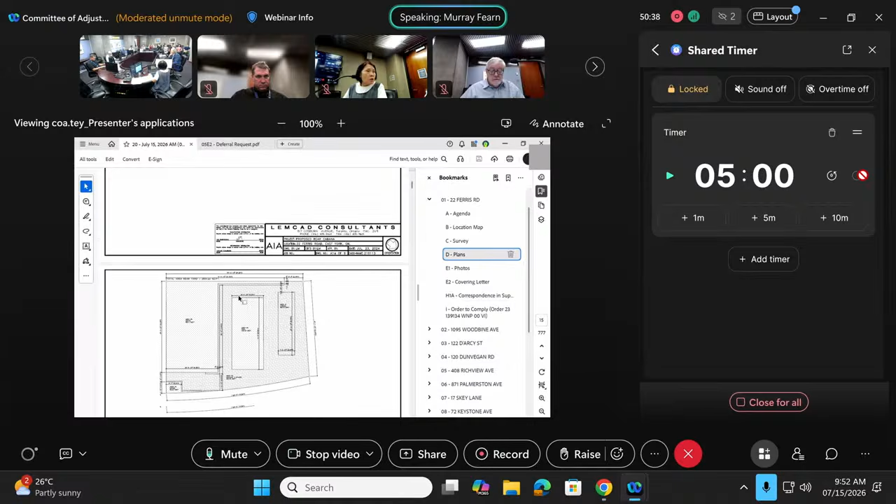I really don't have an answer for that. I know the original designer, Lemcad Consultants, that was their name. I just have a feeling that they told the owner that they didn't require any variances. But they did produce a set of permit drawings, and again, because they required variances, they couldn't make an application for permit. Again, it's unfortunate that this was built.

It seems that the order to comply was issued in 2023, which is, I guess, 3 years ago. You're taking this long to comply with the order. I mean, this cabana was built even before that, right? Yeah, I guess. Yes, it was 2023, but I think it was built before that. We just like to get some background for the application. Sure, that's all.

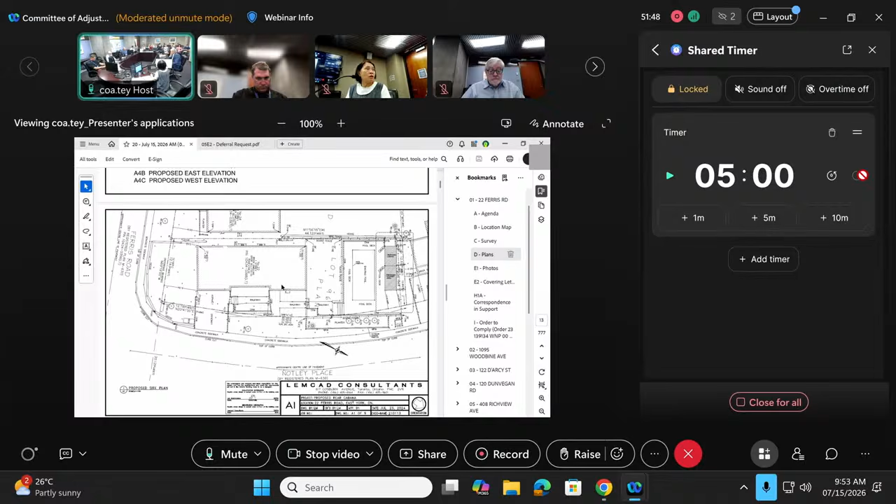Let's see if other panel members have any questions. No questions? So are we ready to take it into committee? We do not have any more questions, so now we're in committee.

I'm not sure the answer we got to the reason and rationale was particularly satisfying, especially the 3-year delay. I mean, I think we all probably know what happened. It was done trying to get something completed without getting the appropriate permits. But what we have before us is a relatively minor series of variances. There is no opposition to this one, and it's really just the setbacks that are the major concern. I don't think, given that this is a corner lot, there's any impact. So given all that, I'll move approval of this application.

Do you want to add the reason for the record? Yeah, thanks. Just because we do not condone people building without a permit, that's why we asked the questions, but I agree we'll do the standard approval for the record. So are you making that into a motion? I made a motion, yeah.

Second to move? Madam Chair, Gary seconds. All in favor with that note? All in favor, it's approved. Thank you.

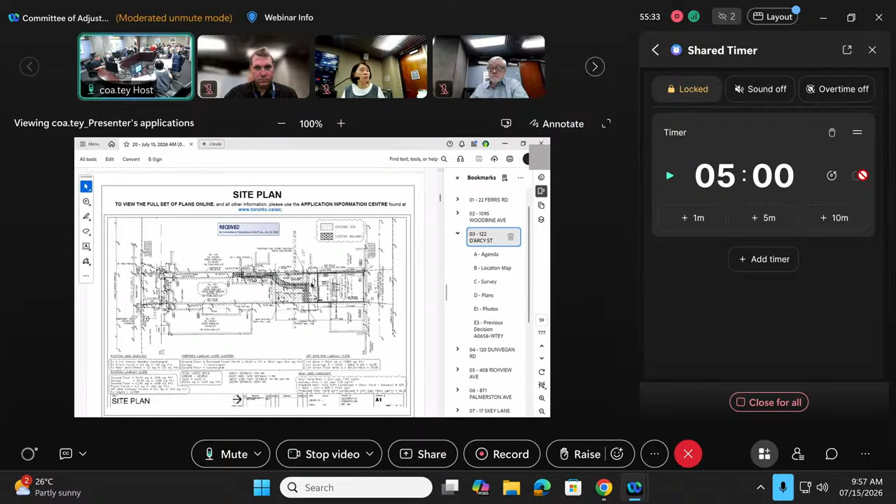My name is Yi Chow, owner and applicant for the variances for this enclosed patio. I've been in communication with both my adjacent neighbors. One raised a little concern about the height of the structure, which we've addressed, and he's satisfied with the proposed structure as drawn for this application. The other neighbor has been supportive all the way.

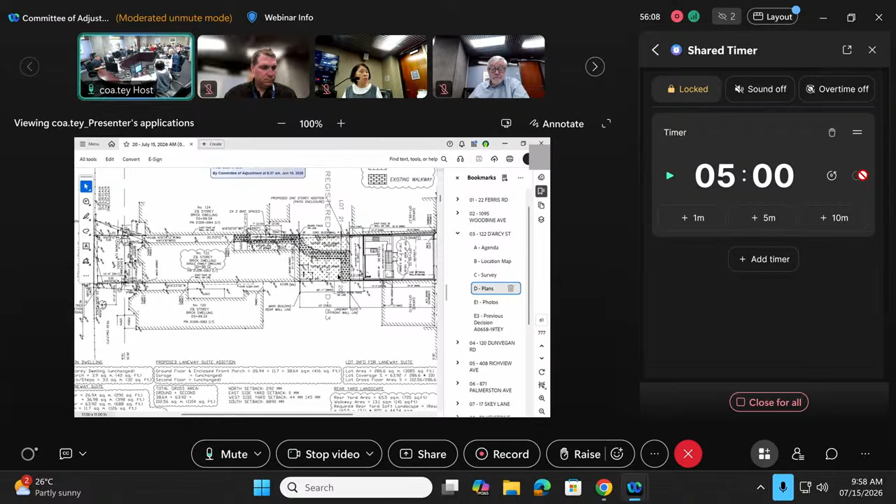The variances are kind of minor. Regarding the space issue, it's really because we built a 4-foot walkway between the front and the back for accessibility, so we can clear snow easily. That's all I have for you today.

Any questions? Just wanted to check in terms of the height. The variance before us shows the height of this ancillary building as 5.73 meters. Has that changed? Yeah, we changed it, we lowered it to satisfy the concern of my adjacent neighbor. I was asking if you have a new height standard you can tell us, because we're looking at the bylaw requirement.

I'm not sure about that, sorry. Just to clarify, this is only a one-story extension, right? Yeah, you're not extending from the roof. No, it's just one story. So the height we're talking about isn't the height of the whole thing, it's the height of the specific little extension. Thank you for that clarification.

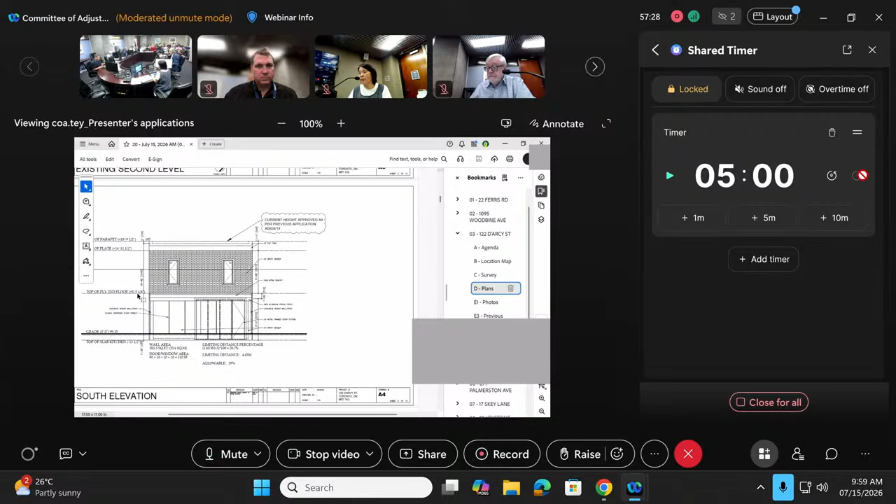In the drawing, A6, the section will show the one story. Yeah, you can bring A6 up.

It's already a sunken patio, right? Yeah, it's already sunken. So there's something on the surface already, you're just covering it and also enclosing it. So how sunken is it? About 16 inches. But right now, when it rains, I'm collecting like 2 inches of water in that area. You can see it is a little bit lower than the grade.

The variance we're doing for the distance from the house is adding this space, right? Do you mind if we tie this to the site plan elevations to make sure it's only the lower level that we're approving? Yeah, it is only the lower level, that's all we're doing. I think the sections show it's only one story, so it's not a two-story extension. No, no.

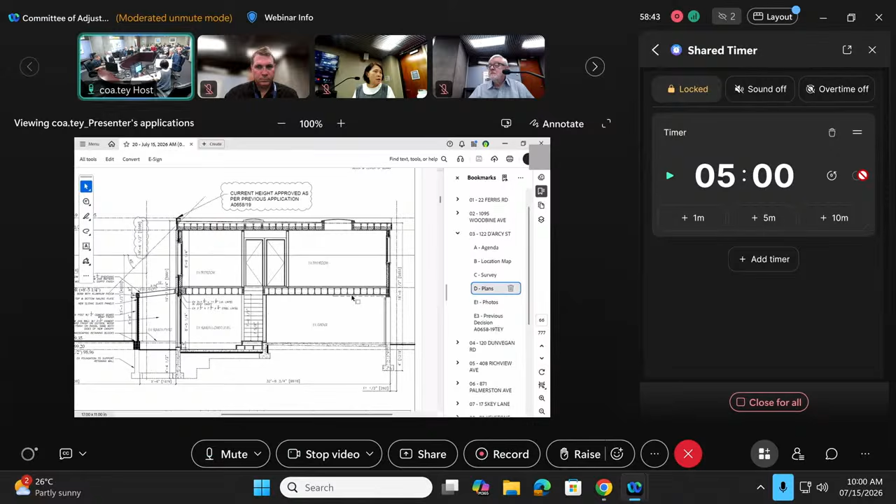The site plan, what number is that in the drawings? A1, and the elevations. Matter of fact, a lot of existing properties are already deeper than I am, and there isn't anyone opposing these applications anyway.

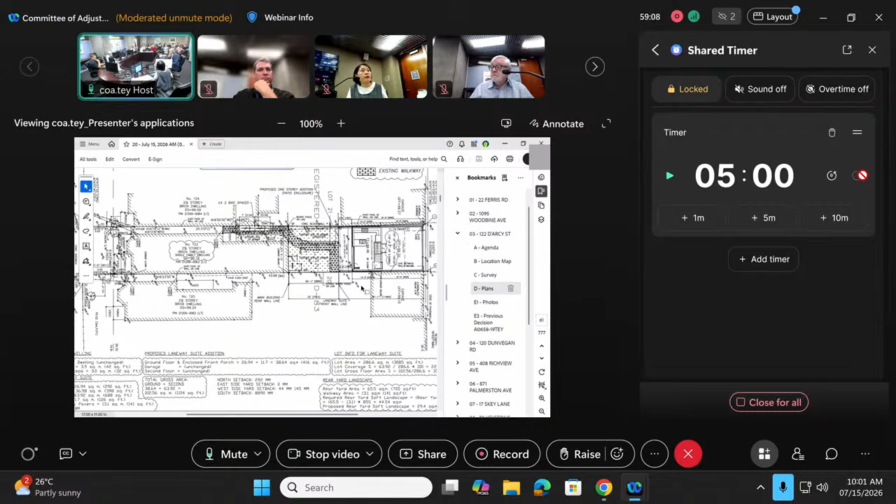Any other questions? All right, we don't have any more questions, we are in committee now. I was initially a little concerned about this in terms of a creeping extension, but I think the explanation makes sense. I understand that because it's sunken, it would be gathering snow and rain, so I understand that. I think this is supportable with the condition that we tie it to site plan elevations.

Is there a motion? It can be, unless anyone else wants to. I'll make a motion to approve these variances with the condition that they be tied to the site plan and elevations.

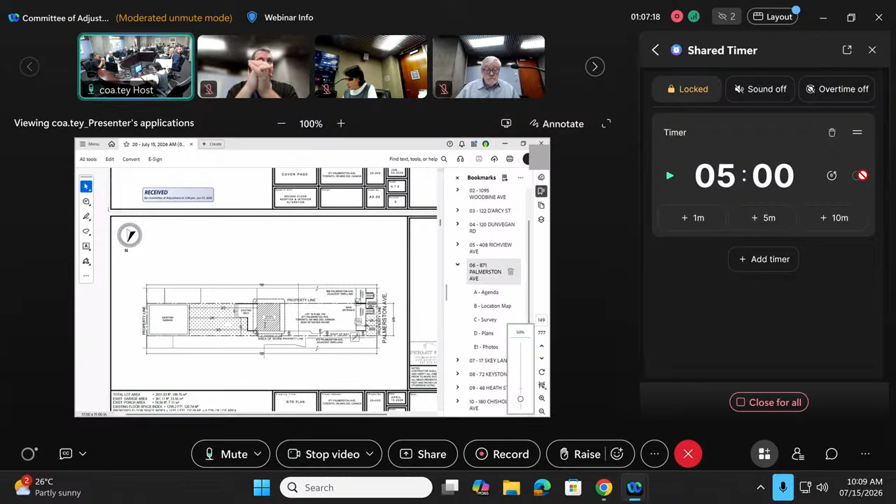Ryan, please. I'll put forward a motion for these 3 variances, that they are granted approval, with no conditions. Second? Gary, second. With no conditions, all in favor? It's unanimously approved. Thank you. Appreciate it.

Okay, item number 7 is withdrawn, and next is item number 8, 72 Keystone Avenue. This is to alter the existing 2-story semi-detached by constructing a front 3-story addition, a front porch and with canopy, and a rear 2-story addition, and a partial 3rd-story addition with a rear balcony, and a ground floor deck.

We have received survey, site plan, floor plan elevations, revised site plan, floor plan elevations, a red line public notice, a revised zoning notice, 8 photographs, and a cover letter from the agent. We have received a staff report from urban forestry and also community planning. That's all the material we received, and we are ready for the agent or the applicant, please.

Through you, Madam Chair, we have the agent online and 2 registered speakers. One of them is the owner and another one is in person in opposition. Oh, okay, thank you.

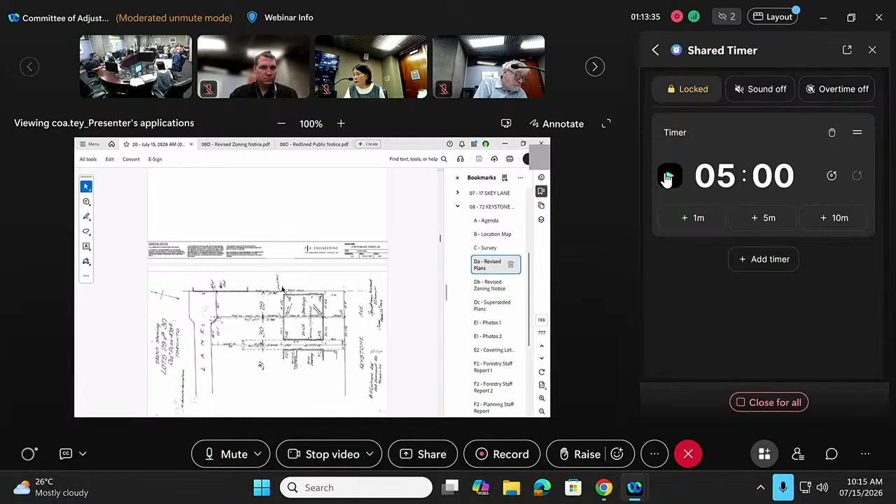Sure, okay. So the current homeowners, Ronan, their family is growing a bit, so they needed additional space. Initially, we had proposed a front and a rear addition. Upon consultation with community planning, we modified the front addition to be only a front porch enclosure, and the rear addition to span the whole 3-story.

There were some minor changes related to landscaping on the rear and the front, because in the rear, 50% of the rear yard must be maintained as soft landscaping. We're close to it, we're about 46.7%.

There is parking at the rear as well, which the owner wanted to maintain. Initially our plan was either to go with a laneway or keep the parking space at the back, so street parking won't be affected. That's one of the reasons they decided not to go with a laneway home and just did an addition on the rear.

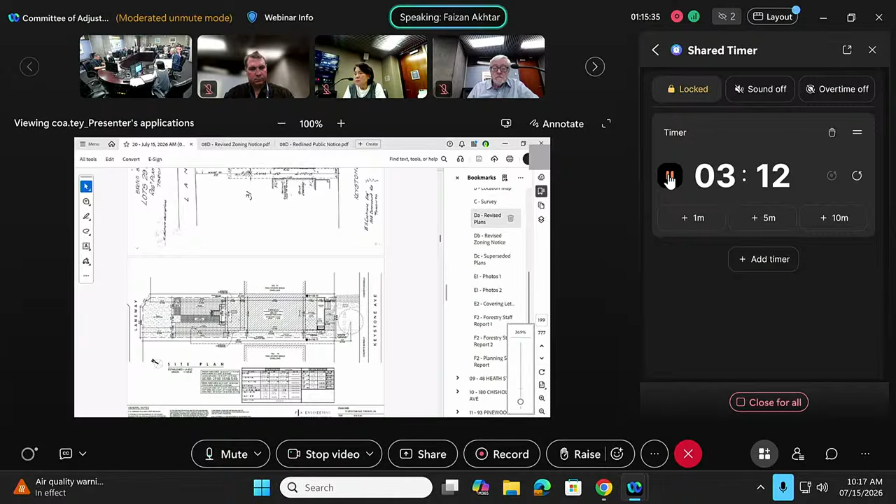Apart from that, there are multiple instances of similar variances that have been received on the street as well, multiple front porch enclosures on the street. Community planning reviewed that, and we had multiple Zoom calls with them, and that's where we came to the conclusion that the front enclosure should be allowed because there are multiple instances of neighbors having front enclosures and similar variances. So I kindly request the Committee of Adjustment to grant us the approval.

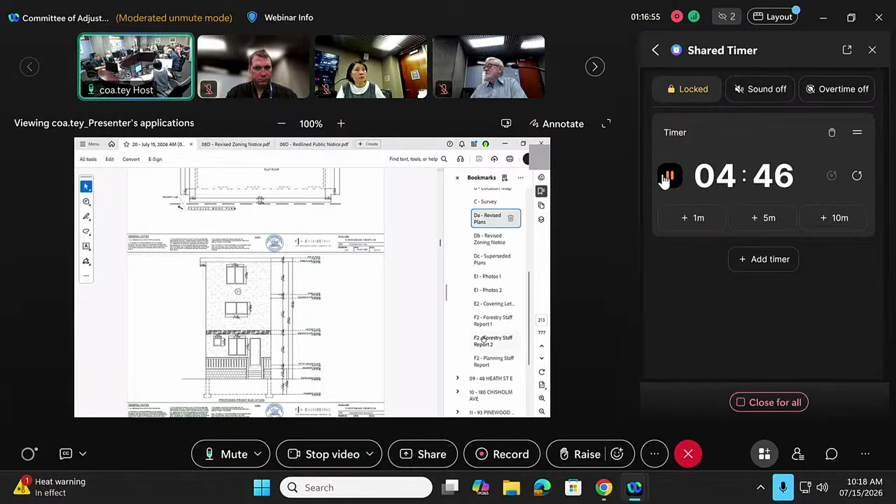The white oak in the backyard wasn't in the original plans, but the city noticed it a week ago and has asked that the committee defer, and if they don't defer, that they make it conditional on some conditions. Yes, I agree with the city. I agree with urban forestry. This needs to be conditional on an adequate, comprehensive tree protection plan.

Yes, we'll consider that for sure. Any other? We still have to take it to committee. The city doesn't have a great track record on white oaks on Keystone. The one at 56 was supposed to be protected, and it was killed by Marlin Spring.

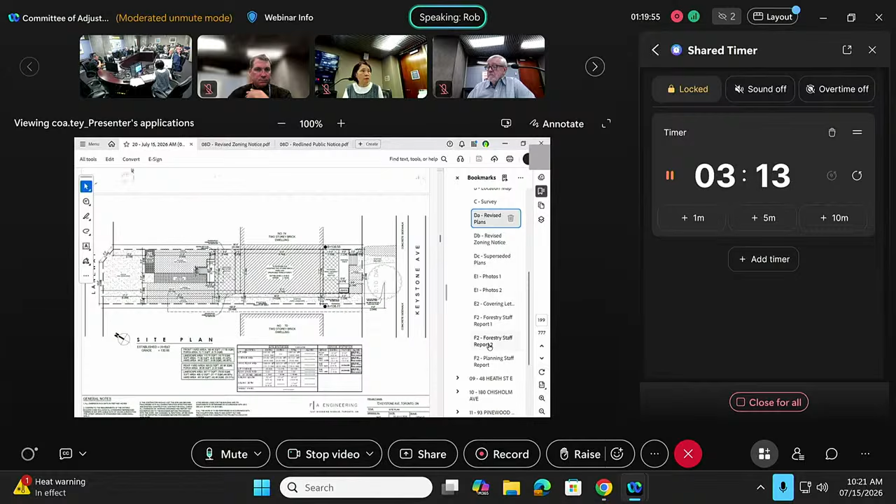Oh wow, it's within 8 inches of my fence, or our mutual fence. I wish it was on my side, I would make sure it wasn't destroyed. But the roots will have to be damaged when they do this addition, and there's no way that this is not going to affect or kill that tree. You can bring in an arborist to check it out, but it's so tight you can't swing a cat in the space between my house and my neighbor's.

As you see in the picture there, it's just a small breezeway. That is the trunk, and it is very tall. The other tree, there was a twin to it on the other side that was destroyed by Marlin Spring when they put up the condominium on the Danforth in the back. It killed the roots in that tree, and it had to be taken down. It really affected the lighting and the whole atmosphere for all the people on the street.

It goes against the spirit of the original bylaws in the sense that all the houses in a row share the same space in the backyard. This one house having an extension in the back would destroy that feeling and would destroy the atmosphere in the back. Anyways, thanks, that's all I need to say.

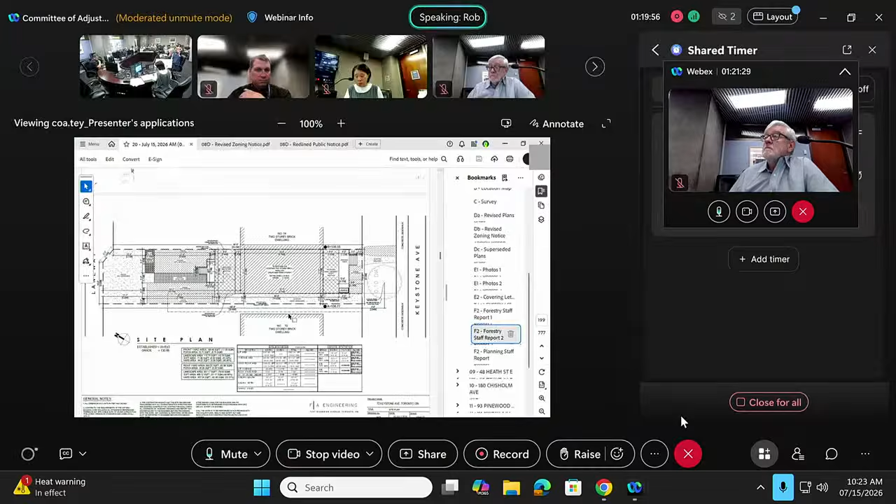Essentially everybody's concern is related to the tree there. Like I mentioned, we've already engaged Davey Tree Expert, the arborist. They've mentioned they'll be working on tree protection itself and any associated measures they would need to take to have the tree not be injured with that addition, the rear addition there. So apart from that, it's not in my expertise, but we've engaged an arborist, and they'll be providing a satisfactory report. And if approved by committee, there will be a condition to get clearance from forestry.

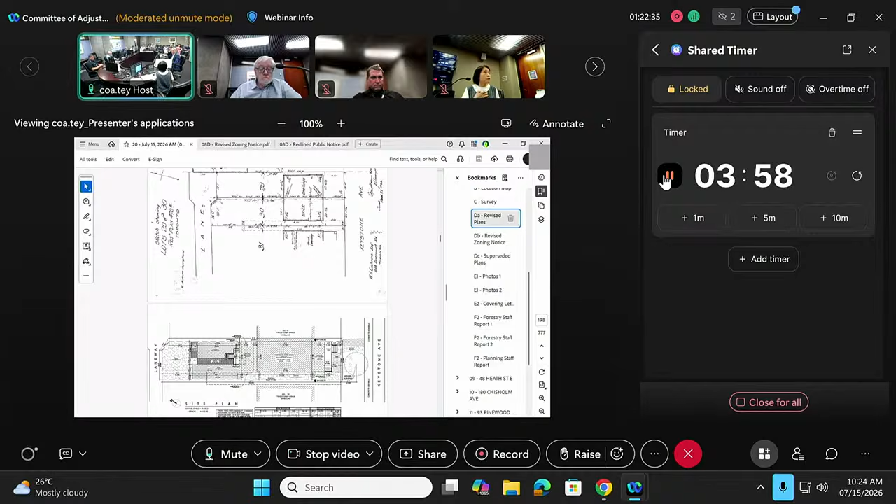Any question? I do have a question for you. By listening to, oh you have. I have a question. Yes, me too. Oh okay, I'm going to ask, and then. Oh all right, I didn't know if you saw me, sorry.

My question is that after hearing the other deputants' comments, it seems that it's not a matter of just you will protect the tree. It seems that the current design or plan will actually inevitably have to remove the tree, and the tree is quite substantial. I'm not too sure you said there's a tree protection plan that has got enough assurance for that tree not to be removed in the future or injured. So what is the plan that you have discussed with your arborist?

What's the intention? So they've assured us that the tree will not be removed or be substantially injured, right? There will be some pruning required to the roots, because the roots do extend outward, but apart from that it won't be removed or damaged. I believe that's the major concern for the neighbors, that it will be removed, so it would definitely not be removed.

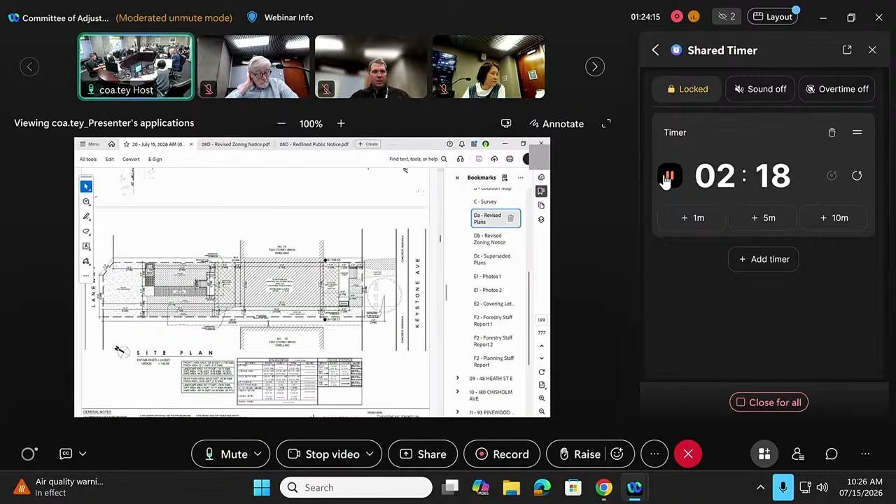Oh okay, thank you, any other question? Yeah, please. Just looking at your revised site plan, the tree that we're talking about isn't on your site plan. I do notice you put a tree in on the front yard, but I don't see it identified in the rear yard on your revised site plan. How far away is the tree from your proposed addition?

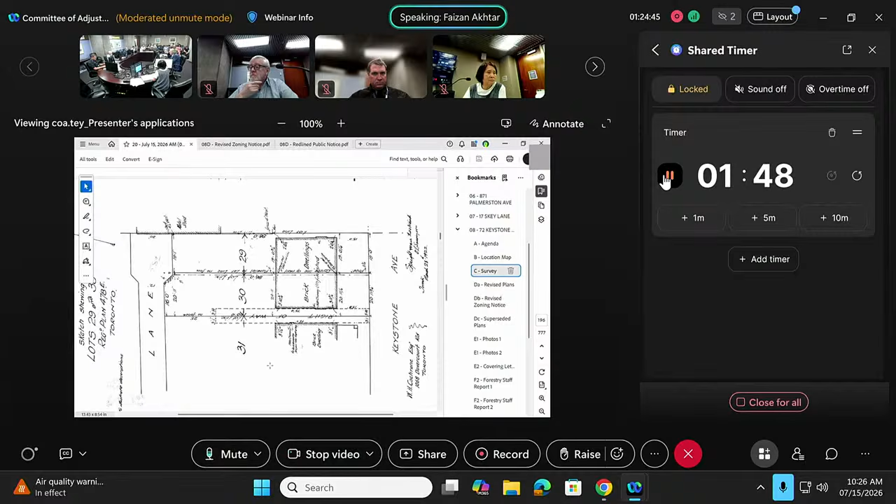So you could see the survey that we were working with. It was a very old survey, I think from the 1940s. It did not identify the tree there, but if you open the site plan, you could see where the tree would be. Here, give me 2 seconds, let me just open it up.

The tree is about 6.5 feet, roughly, from the addition itself. We do not know exactly because it's not indicated. So you're saying it's about almost 7 feet from the corner of where you're proposing to excavate the basement foundation. Correct, yeah, that's what we discussed with the arborist, about 6.5 feet away from that addition.

So any injury to the roots that extend outward will be minimal. Right, and depending on what forestry says with respect to that, would there be mitigating measures done if in fact there was going to be irreparable damage done to that tree?

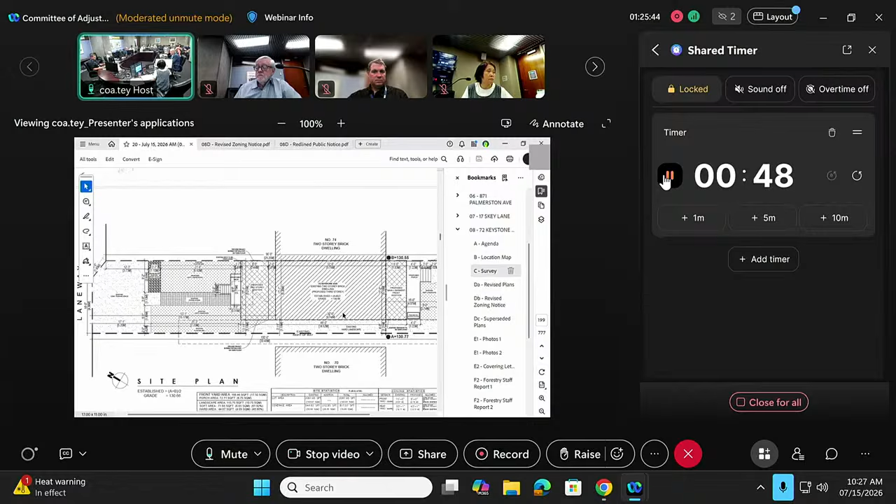I just note that in the forestry staff report, they do include a photo of this tree. And I think the neighbors are rightly raising concerns because it is a fairly mature oak tree, which does a number of things, not only shade, but it also shields some of those residents from the large condominium behind, which is a helpful part of the backyard viewscape.

So I think what you're hearing is that the neighbors are very concerned about this tree, and I think rightly so. So you're telling the neighbors that if there's any damage at all, it'll be minimal? Correct, yes. And if forestry requires any mitigative measures to ensure protection of that tree, you will be doing that? Correct, yes. Okay, please, yeah.

I mean, 7 feet is actually quite close, given the usual tree protection zone for a tree this size. If forestry says that you can't dig out the basement and need to use helical piers or something instead, is that something you're willing to consider? Correct, yes. We're even looking to build it on sonotubes if forestry doesn't give us clearance for the basement excavation.

Okay, yeah, because I feel like that may be the issue, that you may not be able to do the basement excavation for the sake of the tree. So, okay, thank you. Okay, so any other questions?

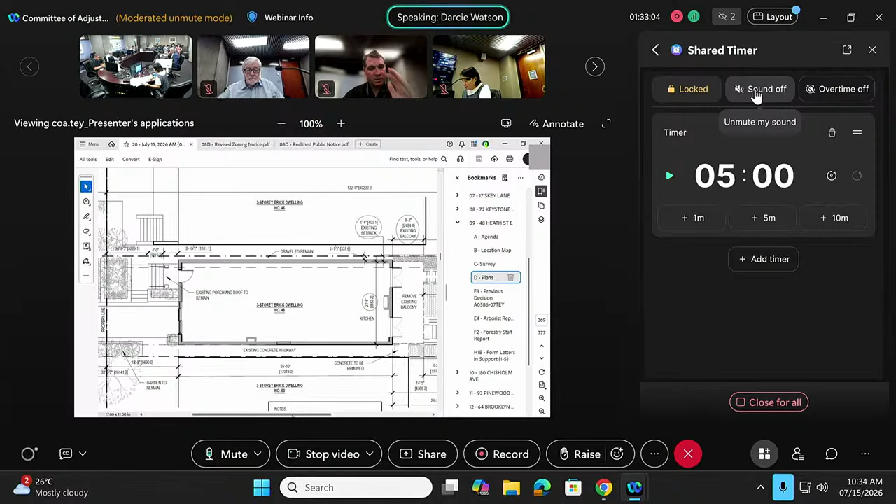The deck, so there's 2 variances. One is on the west lot line, and we're suggesting the deck be built in exactly the same location as the existing. In terms of depth, we're asking for 2.9 meters instead of 2.5. The reason is it's an unusual split level plan where the first floor housing the kitchen, dining room and living room that this deck serves is 1.9 meters above grade instead of the standard 0.9 meters or 3 feet. So that's one reason for the additional depth, which is 0.4 meters, so 1 foot 3 inches additional. So it's slightly larger. Slightly, yes. Okay, thank you.

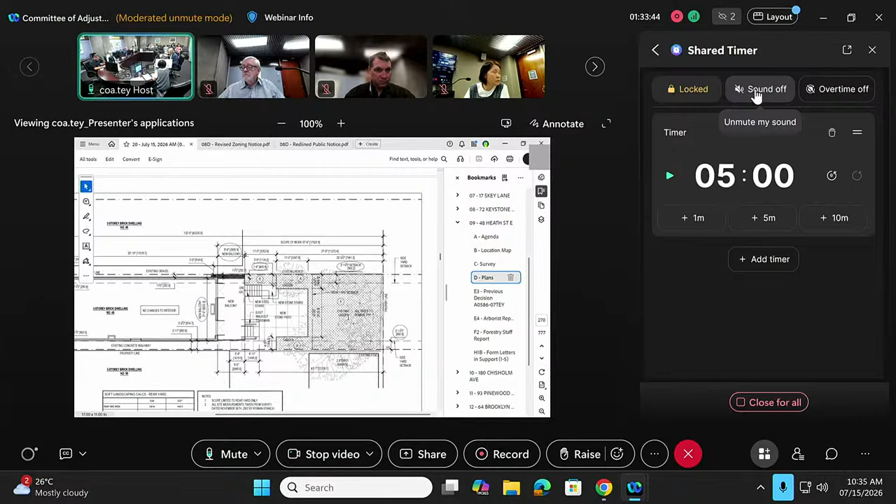Just a quick question, looking at your site plan. I noticed in the photos you have paving stones in the rear, and your site plan says the paving's going to be removed and replaced with what? We're taking out the smaller brick-sized pavers and putting in a 2-foot by 2-foot paver instead, essentially replacing the existing patio. And the rest of the rear yard is sod, grass? It's grass at the moment, and it's actually a very well treed backyard. There's quite a few trees around and we're not touching any of them. We want to leave the full treed backyard feeling and leave the existing sod or grass. Okay, thanks.

Thank you, any other questions? All right, we are in committee now because we don't have any more questions.

Yes, please, I'm happy to move a motion. These are really minor. It's essentially rebuilding what exists, slightly larger, with no impact on soft landscape or anything like that. So I think the impact is really minor variances. I'm happy to move a motion to approve it with forestry condition number 2. Okay, Larry, second. All in favor with forestry conditions? All in favor, it's approved unanimously.

Thank you. And next, do we need a break or shall we move on? I can keep going for a bit more. Okay, one more.

Item number 10 is 180 Chisholm Avenue. This is to alter the existing one-story ancillary detached building, which is a one-car garage, by constructing a one-story addition to the ancillary building for non-habitable insulated storage space. We have received a survey, site plan, floor plan, elevations, 5 photographs from the agent, and also a staff report from Urban Forestry. We're ready for the agent or applicant.

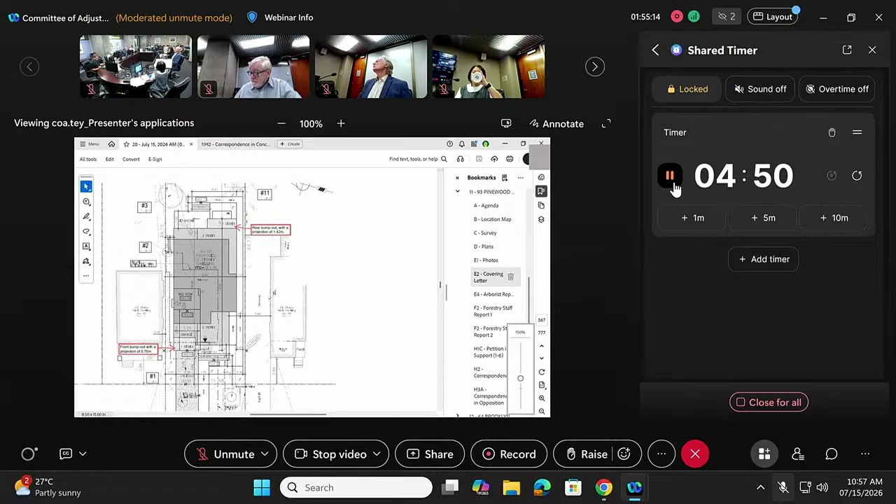In terms of the proposed variances, we are requesting approval for only 3 variances today. I did submit supporting sketches attached to my planning justification letter as Appendix A. So while staff brings that up, I wanted to note that.

Yes, right there. So the drawings on the left are what's being proposed—those are the proposed elevations. The sketches on the right are what could have been proposed if a flat roof design was introduced. This comparison is important because if a flat roof was proposed here, the variance for the side main wall height would not have been required, as long as the front and rear main walls were set back 1.4 meters. The yellow shading represents the additional massing that could have been permitted if a flat roof design was proposed. Rather than proposing a flat roof here, my clients decided on a sloped roof design, which is why this variance was triggered, because it fits in and reflects the existing character along Pinewood Avenue.

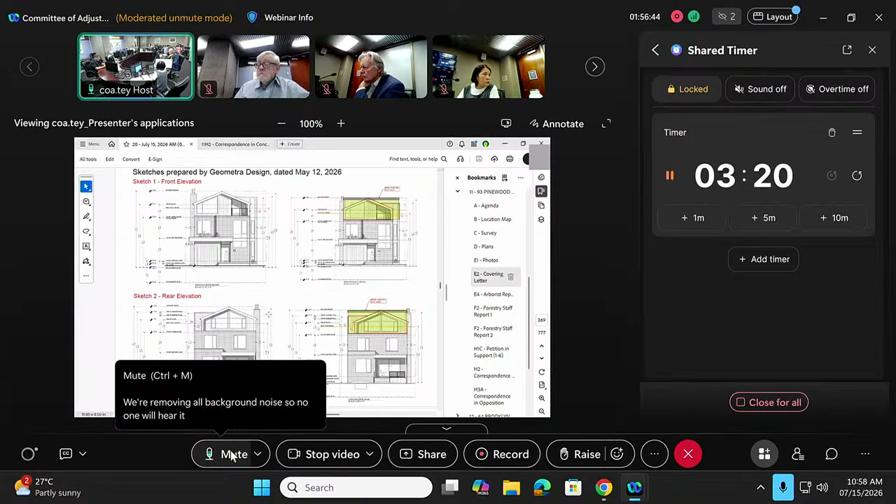I would like to note that the proposal on the third story is stepped back 2.79 meters from the front main wall and 1.42 meters from the rear main wall, which actually exceeds the setback that would have been required if a flat roof design was proposed. To conclude with that variance, the maximum permitted building height is 11 meters. We are compliant with that, and the bylaw does permit 3 stories here.

The second variance relates to the building length. If we could go back to the attachment within the text of the planning justification letter, that would be great. The building length is only triggered due to 2 bump outs, one at the front main wall and one at the rear main wall. If these bump outs were not included, the building length would have been 16.82 meters, which would have been permitted as of right.

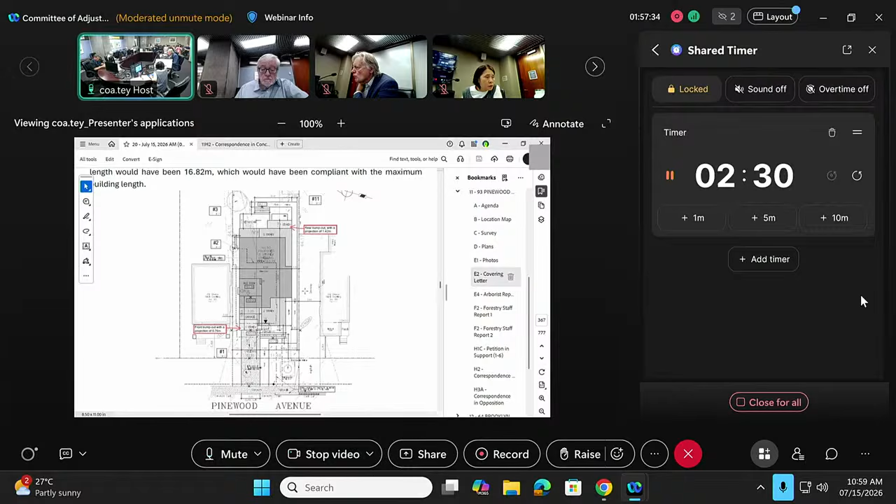The last variance relates to the front porch stairs. The front porch stairs will be 4.42 meters, whereas 2 meters is permitted. It's been designed to fit in architecturally with the front porch and complement the overall architectural design of the front entrance.

In conclusion, the proposed development and associated minor variances make efficient use of the property, meet the 4 tests under section 45(1) of the Planning Act, and fit in with the character of the neighborhood. I'm happy to answer any questions.

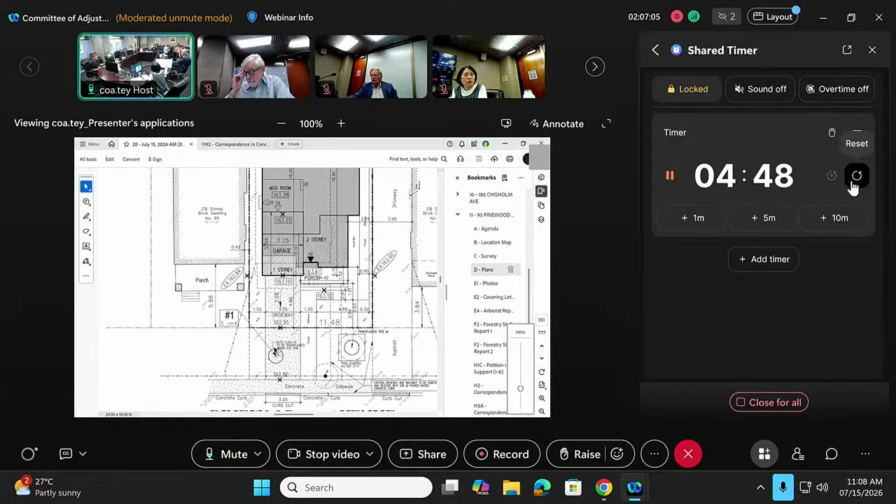I do want to start off with the comments regarding the driveway. The intent is to relocate the driveway, however the existing driveway and that curb will be restored, so there's only going to be one driveway. I did want to clarify that for the neighbors because I did hear that a couple of times.

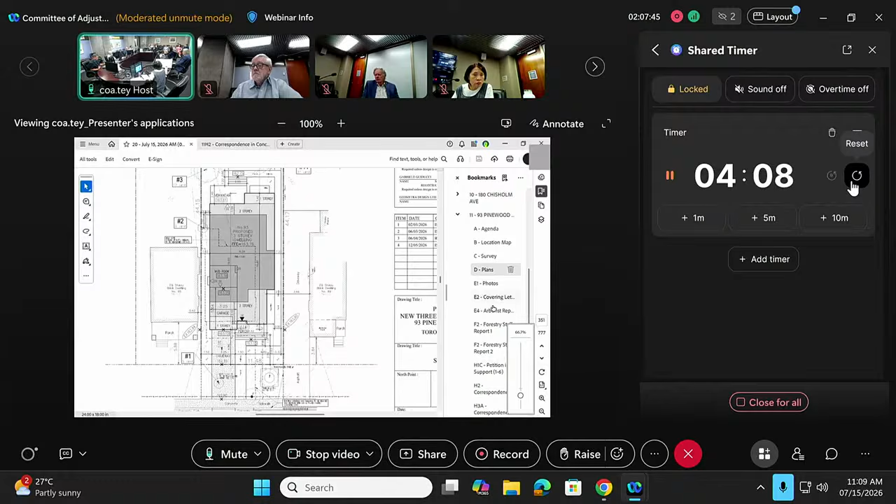In terms of the trees, I would like to note that the tree in the front yard, in the city-owned right of way, is going to be transplanted. Tree number 4 is recommended for removal, and as per the arborist report, it's due to structural conditions. The arborist report notes that to compensate for the removal of this tree, the city is expected to request 3 replacement trees be planted on site: 2 tulip trees and 1 red maple tree. And I did cover the loss of on-street parking.

In terms of neighborhood character, I would like to reiterate that our client specifically chose to do a sloped roof design here because it fits in with the existing character along Pinewood Avenue. That's why my client did not propose a flat roof, or else we would have not required one of the variances that's in front of the committee today. So our client wanted to design something along with the architect that's reflective of the neighborhood.

One final point I would like to mention is that over the past 10 years, there have been 205 committee of adjustment applications within 500 meters of the site. That demonstrates there has been redevelopment within the neighborhood, although the proposal in front of the committee today is reflective of the existing character and the planned context for the neighborhood. I believe I did answer most of the comments and concerns raised, but if I missed anything, I'm happy to answer any questions. Thank you.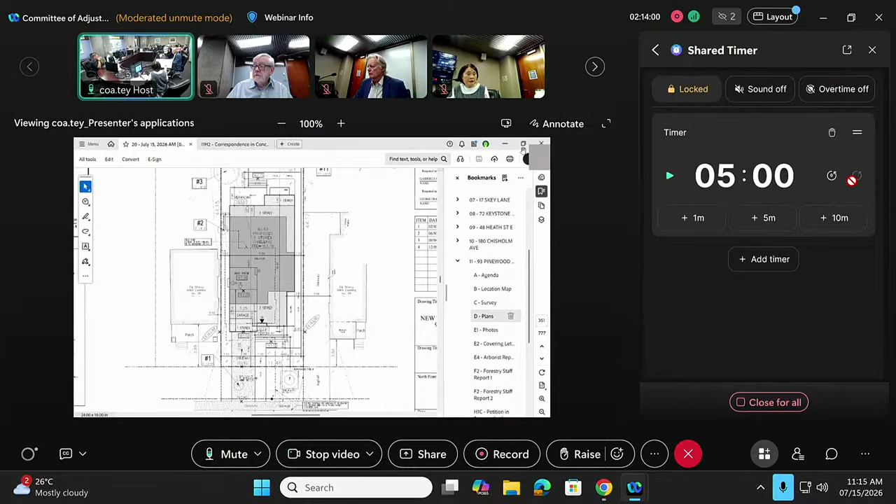Any other questions, please? Okay, now we do not have any more questions. We are in committee now.

I'm struggling quite a bit with this one because I do believe it's an improvement to the neighborhood and to the street, replacing a derelict house with a new build. But when I look at the recommendations for forestry, I agree—can that driveway be redesigned? How do we prevent injury or the need to transplant the red oak tree?

Chair, I agree with tying it to site plans and elevations and curb restoration. I just don't know if the forestry recommendations are worth preventing this project from moving forward.

No, the tree—if you look at the photographs and the site plan, it says 0.05 meter diameter, meaning it's about two inches, an inch and a half. So if that got killed, they'd just buy a bigger one in a new location. It's a tiny tree, a very, very tiny tree. I don't think there's a need to split hairs over a small tree, and I don't think it's something that should prevent an improvement to the street from moving forward.

So I'll be supporting it. Thank you. We'll put an urban forestry condition. I think forestry can still say no and force them to redesign the house and move the driveway as forestry suggested, so it's up to them. We can put forestry condition 1 as the applicant suggested.

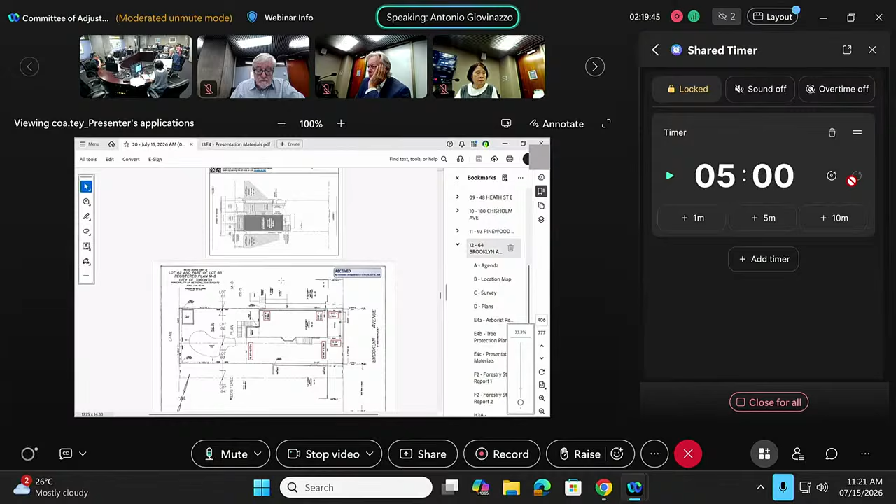Hi, my name is Antonio Giovinazzo from Limberlost Design Studio, and I am the applicant on the file, and my address is 887 Dundas Street West, Toronto.

It seems that you do not have any other person who wants to speak, but let's see, we do receive one letter of opposition from 51. Let me see whether the panel wants a presentation. And so we do not need a representation from you, but can you quickly address the number 51 Brooklyn concern? Yeah, of course. They're neighbors across the street from us, on the other side of the street.

As soon as we saw this letter last week, we reached out to them. The homeowner was able to speak to them and reassure them of our construction and how we're going to beautify the property, and the steps we've taken not to overdevelop it, where we've actually decreased some of our scope of work that was originally included. He included some construction scheduling and assured the neighbor that street shutdowns would not be in effect either. So we're trying to work cooperatively with them. From the feedback we got from the homeowner through text message, it seemed like he was favorable to it after a conversation, and it seems like they're in good spirits. So yeah, I feel like we addressed that all through our conversation with him.

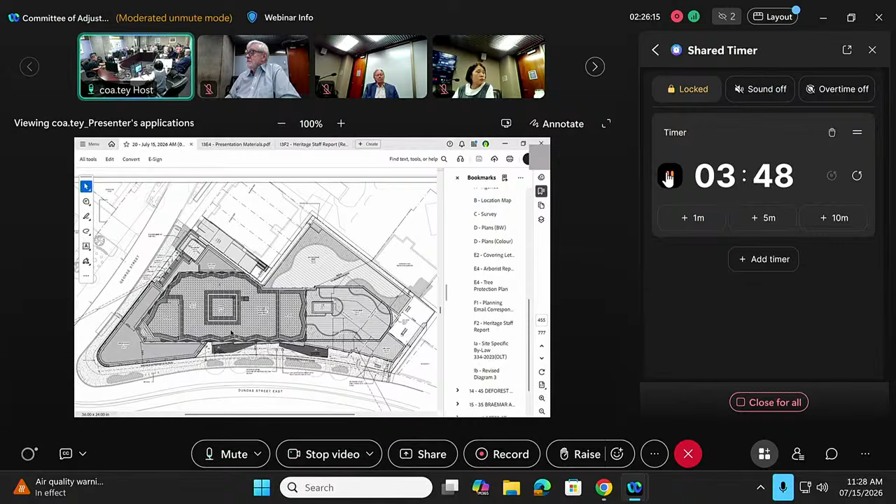So essentially, the bulk of the retail frontage is actually a gym, a publicly accessible gym, which will be fully contained within the heritage component. But because it's a rental building, we need a sales office and a rental area. So it does operate as a mercantile function. However, the zoning bylaw interprets it as an accessory use to the residential occupancy.

So as a result, it doesn't qualify as a commercial use adhering to the retail requirement. In essence, if you took into consideration the entire frontage that's being animated, we still are consistent with the provisions of the zoning bylaw. It just comes down to the ultimate classification of the function of that sales use behind the front door. So essentially, those are the variances.

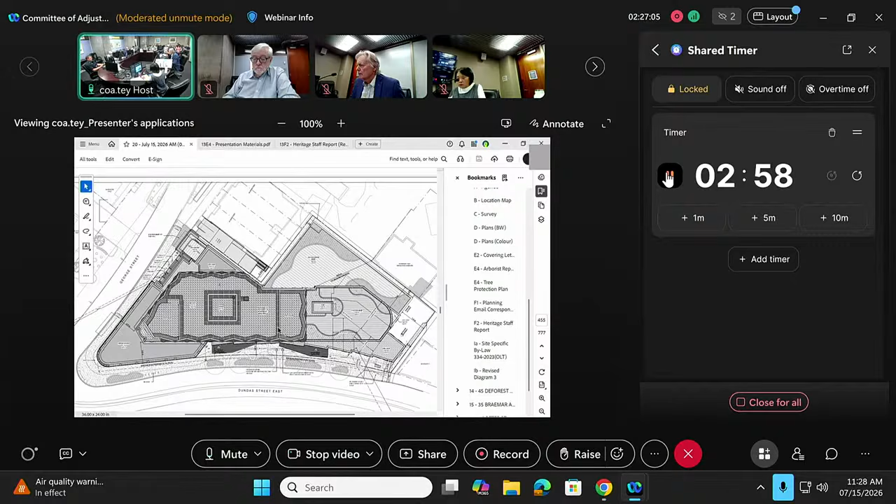In my respectful submission, they're in keeping with the general intent of the original zoning bylaw. Obviously, this is within an MTSA. We're looking to facilitate 4 additional rental units within this area.

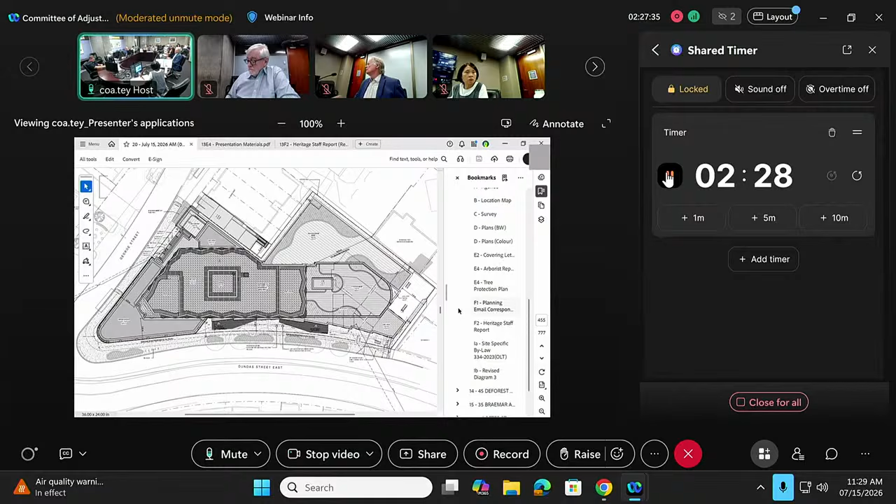And it's in keeping - we work tirelessly with staff in the Heritage Department to ensure that the proposal continues to represent the objectives of the Garden District Heritage Conservation District, and they've written as such, as well as community planning writing that they're generally supportive of the application moving forward. So I'm here really to answer any questions that you may have, and that's basically it.

Okay, thank you. You want to ask the question now? Okay, sure. So the Heritage report seems to have a concern about the change in the setbacks. Can you explain what's going on there?

Yes, sure. It's kind of weird because what we did was we only sought to change any standard, any minimum that we would need to change. So if you look at the revised Diagram 3, we only went and changed any development standard that needed to be modified.

Heritage is the process that we undertook. We actually sought to provide a greater setback. Our site plan submitted with community planning reflects that larger setback, because Diagram 3 prescribed minimums. So in essence, it doesn't form a variance by doing what we're doing - we were just leaving the old Diagram 3 standards the way they were. We didn't opt to change it.

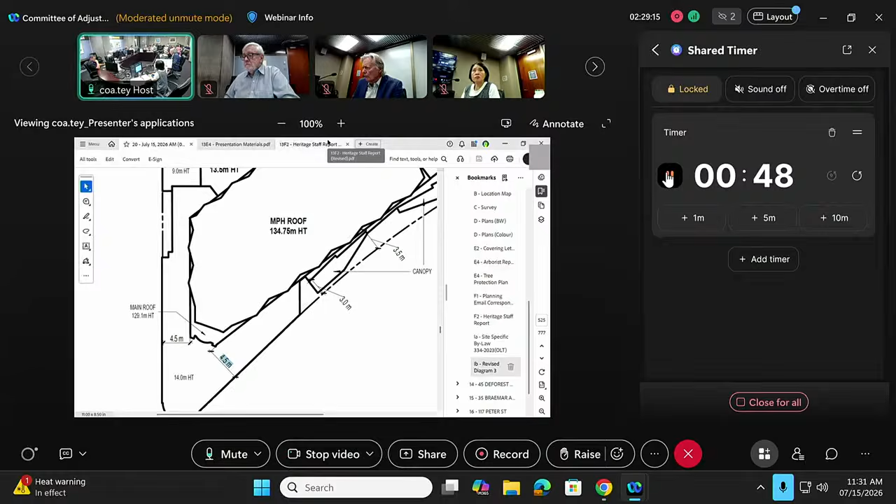So, sorry, I just want to make sure I understand - that's the 4.5 meter setback they were concerned about, that was the old standard. But they claimed the old standard was 6.5. No, that's the new one, that's what we're providing. Oh, so you're actually now providing 6.5, whereas before it was less - so it's an improvement.

Why would they object to that? They're not objecting. They're basically saying we moved forward with the Heritage process and secured their approval through the Heritage process with a larger setback than what was previously permitted at 4.5 in the original site-specific zoning bylaw. So in essence, right now we're actually providing more than the minimum standard.

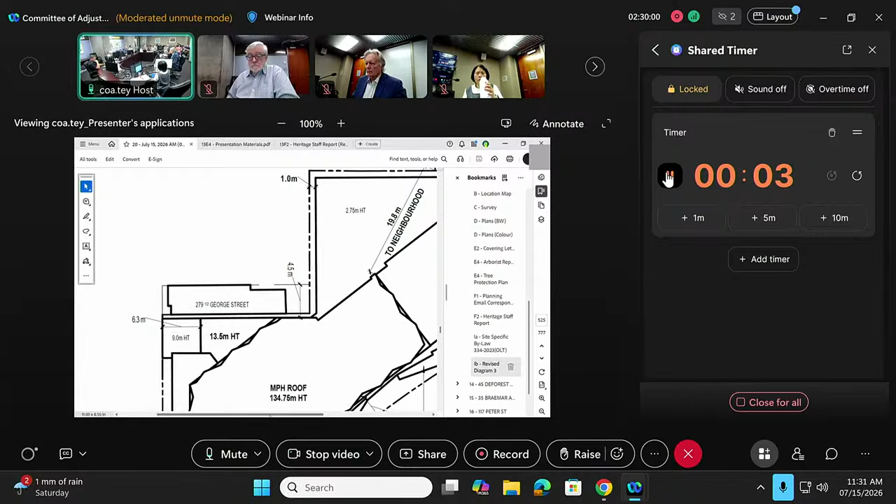It sounds like you are changing some other setbacks. We are, yeah. The other two variances are very clear, but that part was not really clear what you're changing - can you explain quickly? If we go to the presentation that we provided - yeah, there's a presentation with lots of red lines on it. Yeah, I can walk you through the red lines. So can we zoom in a little bit for everybody's benefit?

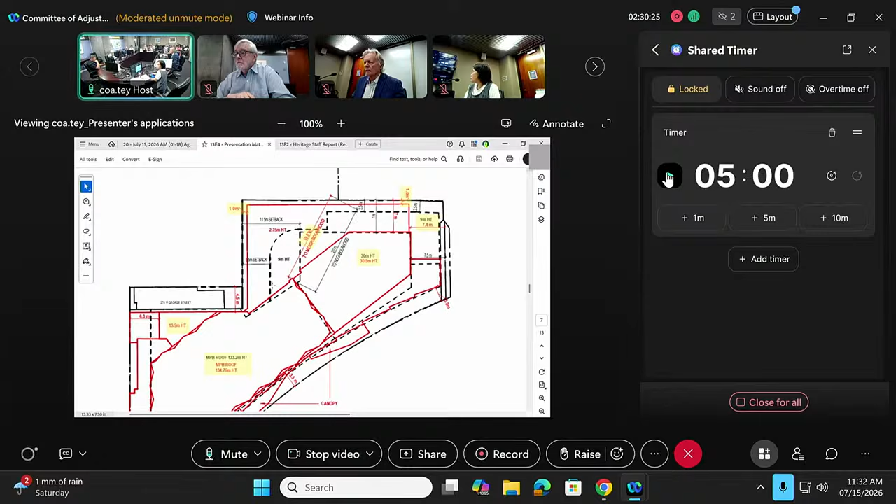The black dashed lines are the original outline. So in essence, the largest change you're seeing - note the triangle just north of the pleated portion of the building, that's the biggest piece being eliminated. So those setbacks in that area are increasing - that's the portion of the building that was removed. All the other standards, like you can see, it says 7.5, the new one is 7.4; the other one said 7, it's restated as 7. So those are the slight tweaks to the actual setbacks themselves.

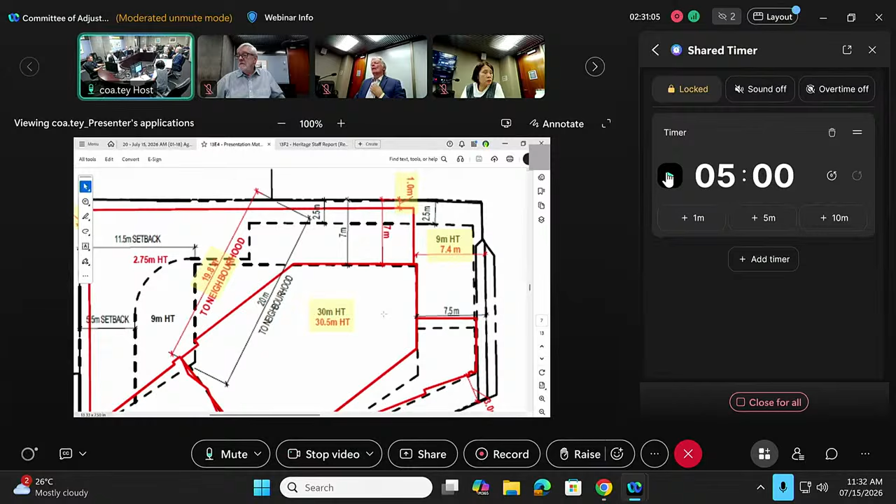So the difference in that northeast corner is where you're increasing - correct, yes - and reducing the setbacks a little bit elsewhere. But that's not going to have a lot of impact on other people. No. We basically fully enclosed the loading function - that area was previously the ramp, now it's the loading dock. We've enclosed it so we have very little impact on anybody around us.

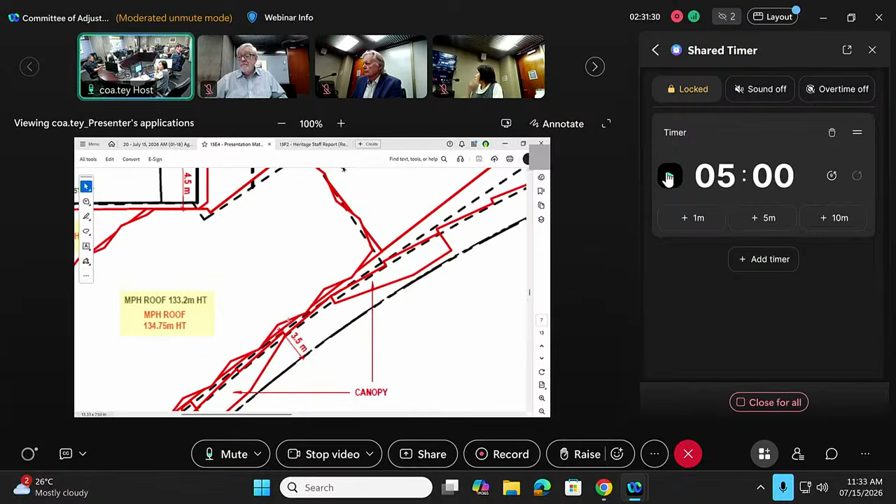Sorry, it just was not clear. If we could zoom down I could show you the 4.5, it's right there, right? Right, so in fact you're pulling back, and pulling back on the other corner as well. Exactly. Okay, that's helpful to understand exactly what's happening. We were a little confused why he wrote it that way, and we called him, and I think he provided clarification, but it's not an objection, obviously.

It's not related to the variance, but I'm just curious - what's the unit mix for all the rental units? We are adhering to the city's standard of 15, 10, 25, for 2s and 3s. So it also complies with the percentage of barrier-free units? Those are prescribed in the building code, yes.

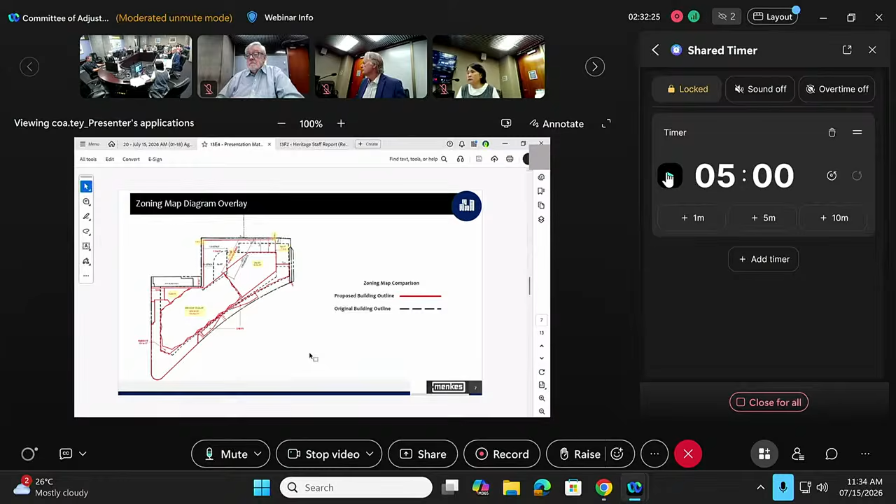Any other questions? So we do not have - you're not keeping Filmores? No, we are not keeping it, because they've actually vacated it already. I think it's going to be a fitness type thing, you know. Well, it's a different type of fitness, a different kind of physical activity. So if this is an improvement is debatable.

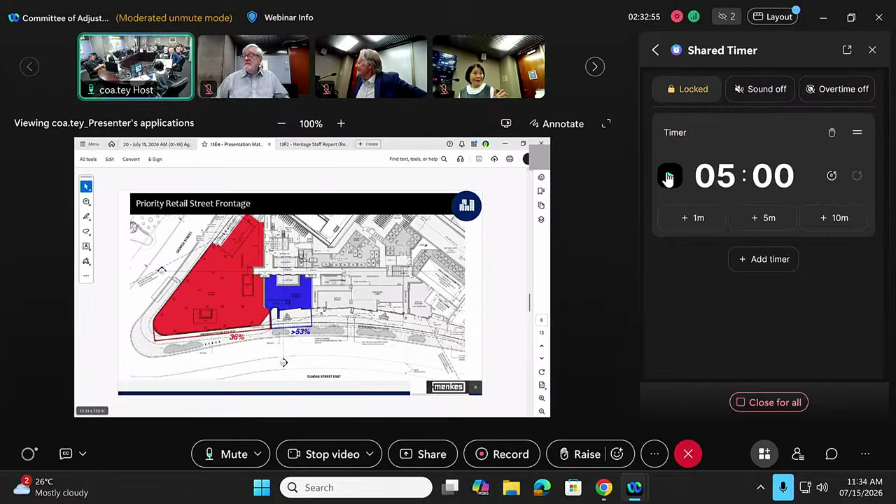Perfect, all right, Dylan's been to Filmores so maybe he should take this up. I am not. Okay, I missed my chance. Do we have a motion here, please?

I think the setbacks explanation is helpful and clears up the only concern I had. I understand the rental argument makes sense in terms of a rental office being effectively like a retail space, and obviously it's needed, so I think that's entirely reasonable.

The height variance is really minor. Planning seems to be okay with the setbacks. Heritage, I think, is clarified, this misunderstanding.

So I'm happy to move approval of these variances. I don't think there's any conditions. No, they have to work with Heritage anyway, but they'll do that regardless.

Okay, anyone, any second? Yes, Ryan seconds. All in favor, with no conditions. Unanimously approved. Thank you for coming.

Item 14 is 45 DeForest Road. The purpose of this application is to alter the existing two-story semi-detached dwelling by constructing an enclosed front porch and a rear two-story addition with a Juliet balcony, a partial rear third floor addition with third-story roof deck, a rear ground floor deck, a rear basement walkout, and a side bay window.

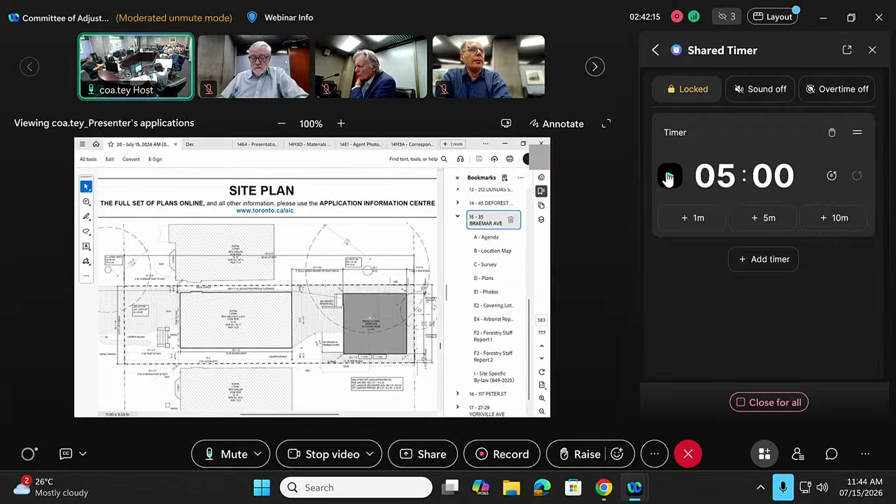So I have a bit of concern in terms of the soft landscaping, not in terms of what you're asking for, but rather what is actually realistic. You have soft landscaping in front of a garage door, and you also don't have any kind of path to the main entrance to the garden suite, it's just soft landscaping. So I'm just not convinced that the soft landscaping you're asking for is actually what will end up being there, because those both seem really impractical.

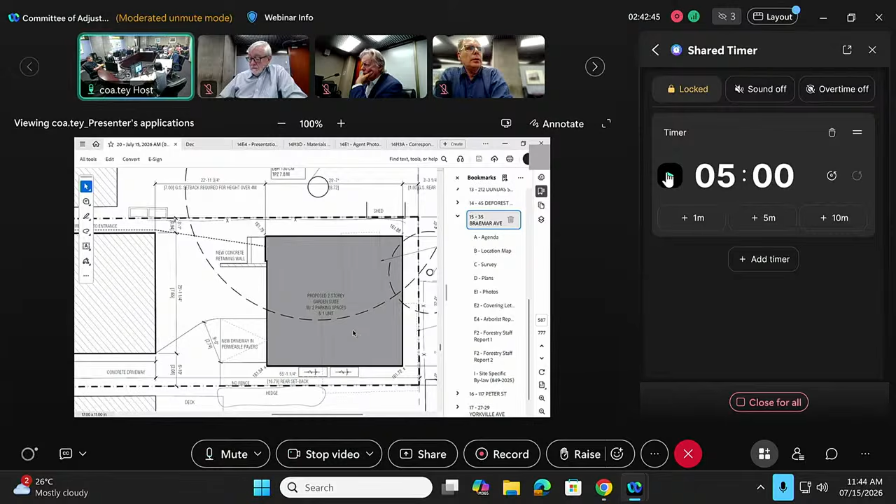I understand what you're saying. This is the older site plan, it's similar, not exactly the same, but similar to the one that was on the screen there. The garage is not intended to be a daily use garage. The owner, it's more that he works on his cars, it's like a project shop for his cars, not a daily use garage.

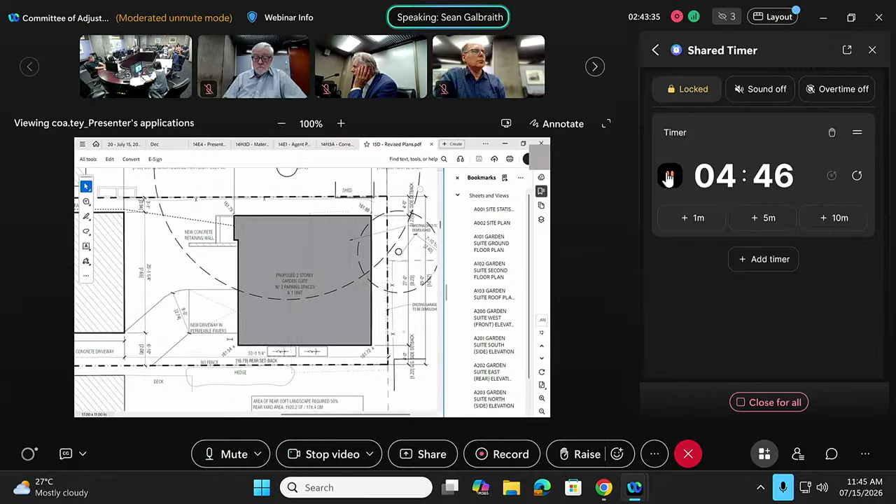It's more for car storage, and that's why there's only the one driveway that connects to one parking space. The other one is technically not even a parking space because it doesn't have a driveway, but it does have a garage door. If it was supposed to be only one parking space, then shouldn't you only have a garage door for that parking space? I understand, I think that was more of a design feature.

And in terms of the walkway to the main entrance of the garden suite? There isn't one, and again that was to maximize the amount of soft landscaping. But realistically, people have to get there, so you're going to create either a muddy track that's not really safe or effective. A walkway could be added and it would not subtract from the soft landscaping because that's a permitted exception in the zoning bylaw.

I'm just not comfortable, because this isn't just for the current owner, this is long term. So someone in the future may say, oh look, there's a 2-car garage, and just pave over in front of the garage door. So either I'd want to only see a garage door for the garage part, or I don't mind if there's less soft landscaping. I'd just like a realistic presentation of what's likely to be the soft landscaping. If we're going to give a variance and it's only 40 instead of 45, I'd rather do that than give 45 and have it ignored later.

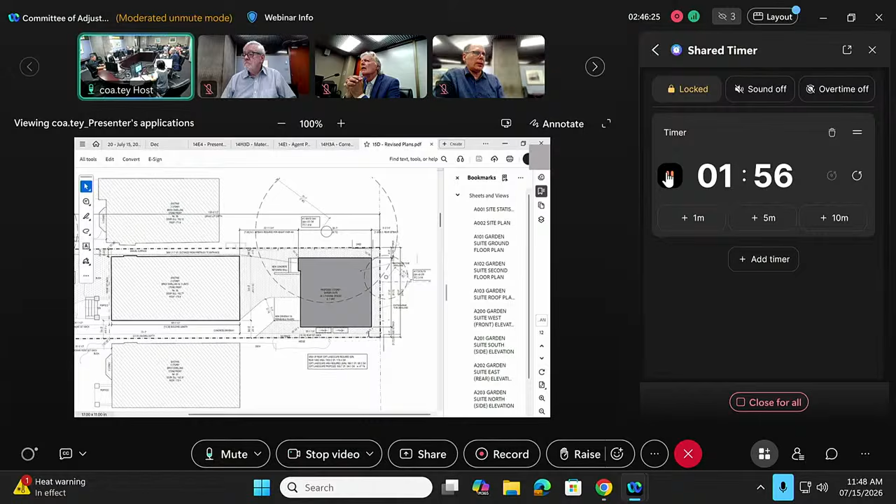Are you requesting him to maybe increase the paved area? I just want a plan that seems plausible. At the moment, it seems contradictory that there's a garage door in front of soft landscaping. I just want to make sure that's clear. It's either going to be that there's only one parking space and the other is just for working on cars, or it's actually a two-car garage with the paving that's required.

I just want to warn you though, if you are requesting a reduction of your soft landscaping, we have to defer this case. I would understand that. You cannot have it with a reduction, you can increase it, but you cannot reduce it for this hearing. The question to my client would be either remove one of the garage doors or we defer it to adjust the soft landscaping. That's my understanding.

Does that sound right, Mr. Reed? Or, could it be reduced from 2 parking spots to 1? I mean, if you don't need a 2-car garage and you restricted it to 1 car, would that satisfy you?

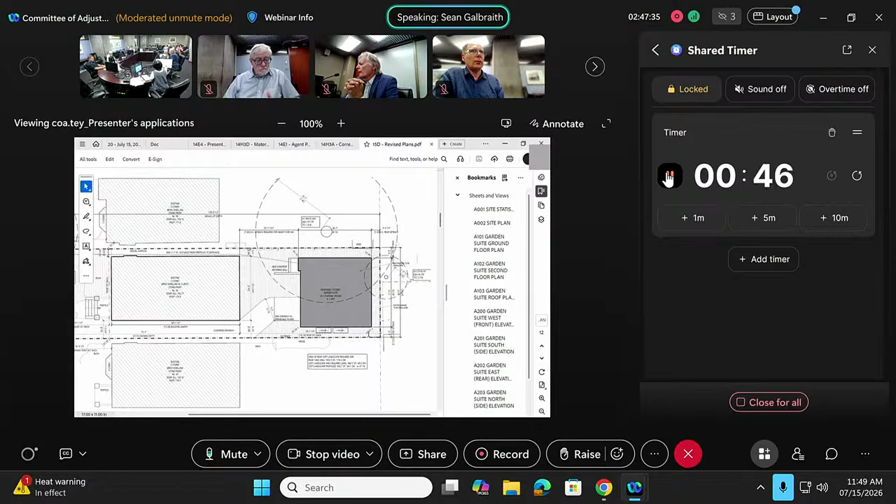Well, he wants to store 2 cars in it. Okay, so one is technically a parking space, but the other one is not. So if it's not technically a parking space, I just don't want it to have a garage door in front of it, because then it's effectively a parking space.

I can, if you wouldn't mind, standing this item, call the architect to find out the answer and come back to me in a bit. Okay, thank you very much.

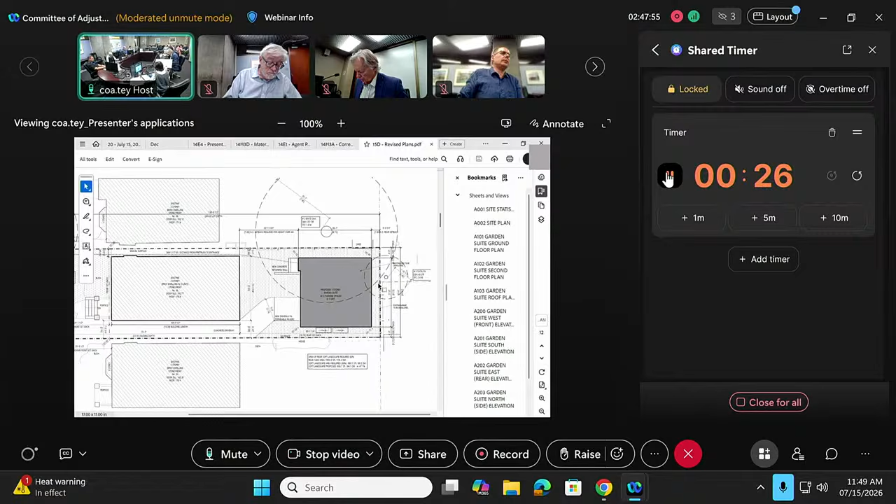Great, so we'll stand that one. So are we okay with 14? Can we get 14 back? Okay, now we go back to item 14, which is 45 DeForest Road. Let's have the agent on this one.

Hello, Joseph, you've been unmuted. Yes, can you hear me? Perfect, thank you. Yes, good, thank you very much. My name is Joseph Mazzatelli, I'm the architect and the agent. This dwelling is for the use of the family and the owners.

We have no major variances - no FSI, no height, no length, no building depth or landscape variances, or parking variances. The variances we're proposing have only to do with setbacks, and the reason we kept that was to be in line with the existing wall of the existing house. We've also sent in information regarding several other properties in the neighborhood that have 3-story additions, and number 40 across the street has a 3rd floor and a roof deck at the rear as we're proposing.

Our 3rd floor addition is only partial, 1 room for the 3rd floor. We've also submitted photographs of other properties that are semi-detached with a 3rd floor addition, and also at 103 Dury Street, you've approved a variance of 1.05 FSI. We don't have an FSI variance.

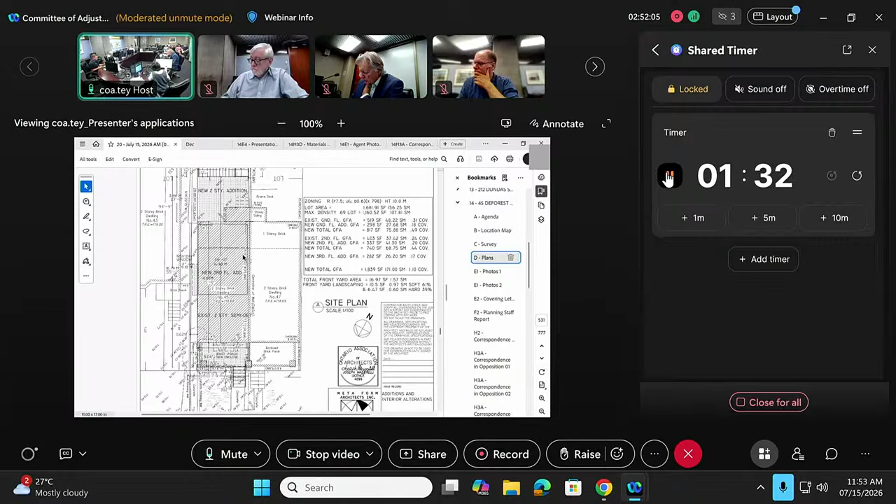All right, any other questions now? We're going to have speakers on this one, okay. We can start with the speakers in person - just come up one at a time, okay?

Good morning, Madam Chair and committee. My name is Dr. Jolene Strudwick, and I live at 41 DeForest, which is 2 doors down. I'd like to start by saying that we were not notified of these changes until about 10 seconds ago. A number of us have prepared to speak without the opportunity to adjust those comments, so I hope folks are aware and understanding of that.

So like many families on our street, we chose this neighborhood because of its strong sense of community and the modest character of the homes. I do appreciate the opportunity to share concerns around this. I want to begin by saying that I'm not opposed to homeowners improving or expanding their homes.

I think many of the homes in our neighborhood have had rear additions, and we have not been approached prior to these variances being put forward by the homeowners around the norms in the community. When they did approach us recently, we advised them to walk around the community to have a sense of the norms. The agent pointed out 40 DeForest Road as a norm for the 3rd story. This is a very different dwelling. That is a standalone home set quite far back.

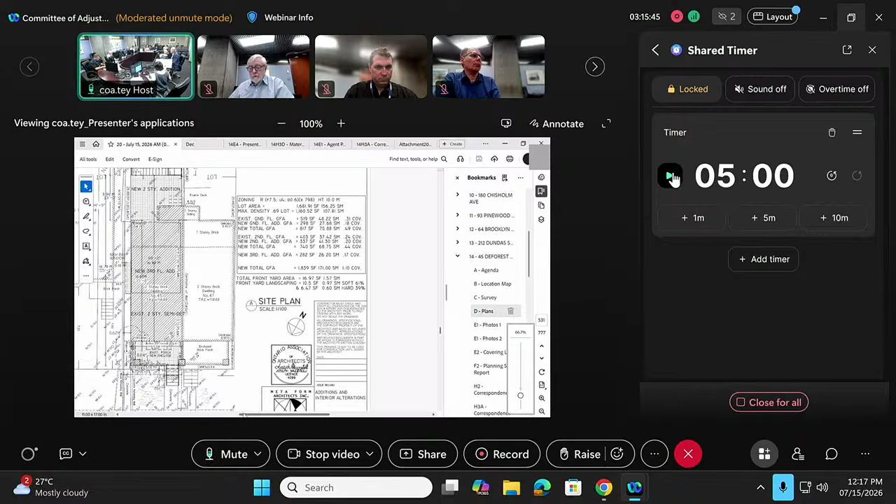It's unclear why, because this is not a houseplex, it's not a duplex. Can we get the variance, because that information doesn't appear? Well, it's on their plans, on the site plan, A1. Yeah, but it's not on the agenda, that's what I'm trying to say. I think that's because it's being considered a houseplex, where FSI is not required. That's what I'm saying. But I think their argument is it shouldn't actually qualify as a houseplex.

Let's get the applicant to address that, because otherwise they won't have that, since it's not on the agenda. And we would also suggest, even if it is a houseplex, which we strongly disagree with, their balconies and porches violate the houseplex bylaws as well -- you can't have 3 porches in the back for a single unit, which they're proposing. Okay, we can get the applicant, there's a little confusion there.

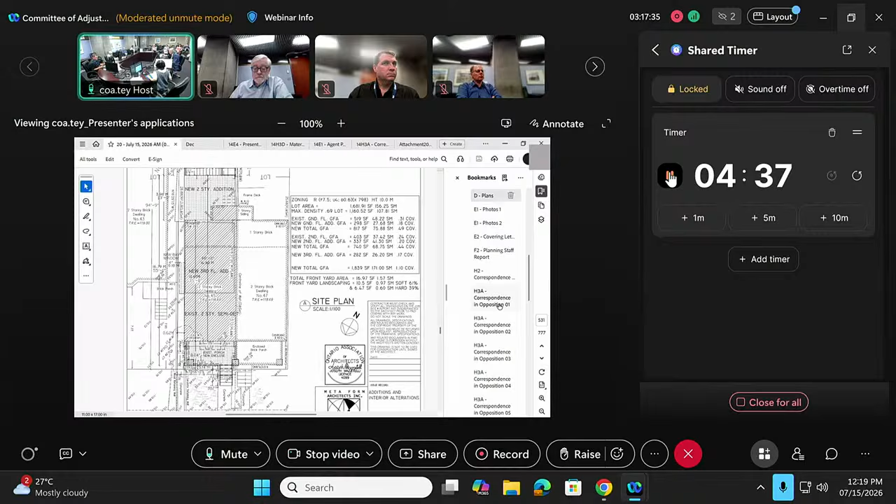It's not going to be aesthetically pleasing to the neighborhood. It could set a precedent with other neighbors to do the same, and it will definitely affect the character of our Swansea neighborhood. My privacy, my views, my sunlight will all be affected by this new addition and the roof deck. So overall, I do not believe the variances are minor, and the proposed structure would come too close to my property. The result would be far more coverage than is appropriate for that small semi-detached lot. Thank you.

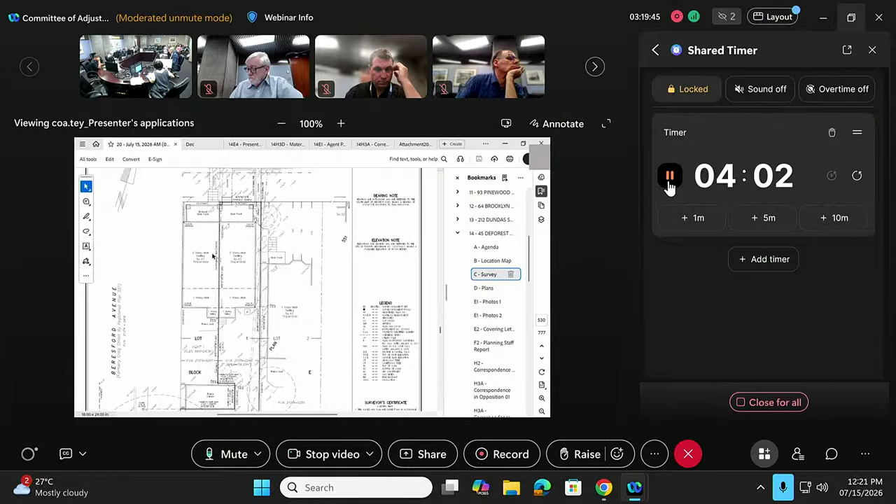I live in a semi -- excuse me -- my neighbors put in a semi addition within the 0.69 FSI. We have a lovely setback to the addition. They put in a 3rd bedroom and a family room without extending to a 3rd floor, building all within the envelope. I'm uncertain as to why this has to be extended with a 3rd floor and back decks. It is just not in keeping with the existing style, scale, and integrity of the neighborhood.

I would like this to go back to rezoning and bring up the issues of the setback on the west line and the FSI. And I thank the committee for their time, and allow me to speak on this. Thank you. Just wait, we'll see if we have questions for you. Any question for this speaker? No. Thank you.

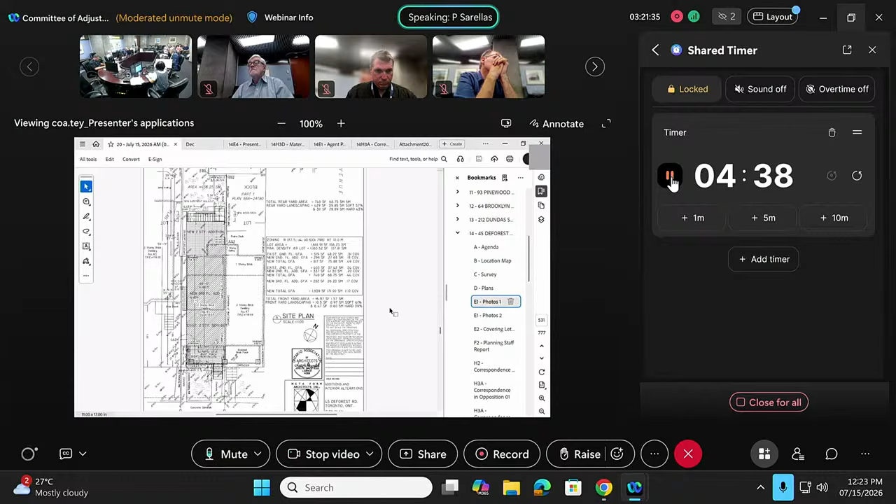My family lives at 49 DeForest Road. We are the second home west of the subject property. We all have narrow lots here in Swansea. Our home has a building 8 feet away to the west, which blocks our sky and sun views. We also have buildings to the south, which limit our sun and sky views. So half of our windows face east, where the subject property is. It's where our kitchen and dining room is, and where we spend most of our time as a family, and that's where we get our sun and sky views.

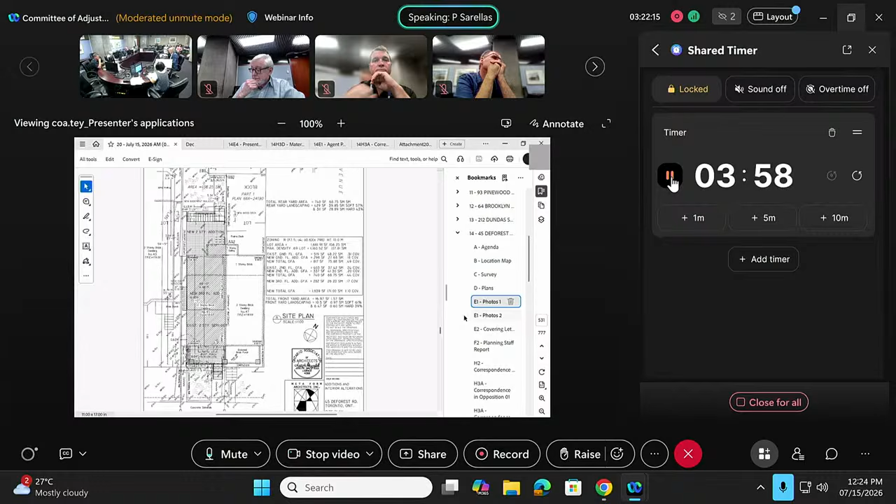The existing properties, which are consistent with the character of the neighborhood, already block a fair amount of our sun and sky views. But this proposal would dwarf those existing properties and practically eliminate any east views or sun. As many people have already said, this proposal is not consistent with the character of our street or neighborhood. There are lots farther north and west of Swansea and in Etobicoke that are 200%, 300%, 400% wider. If one wants to build so much square footage at such height, it would be reasonable to do so on an appropriately sized lot, not at the expense of the neighborhood and of one's neighbors.

In conclusion, due to its narrow lots, its excessive height, its excessive square footage, and the close proximity of neighboring narrow lots, this proposal, in my opinion, is inappropriate for this location. It's overdeveloped, and it would be detrimental to the reasonable enjoyment of our homes and our properties. Thank you for your time.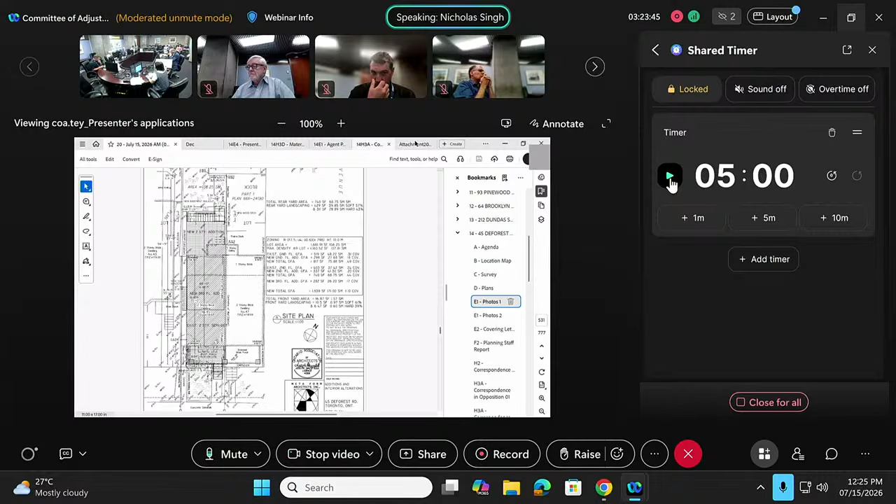So the massing of this building is a universal concern to all of the neighbors. Every one of the 23 letters that you received talks about the impact that it's going to have on their properties. I appreciate that this has been reduced to one variance. However, one of the controls for massing, which is the concern for most of the neighbors, is FSI.

It's been mentioned already, and my understanding of the reason this building does not have a cap for the FSI is the secondary suite. The idea of the removal of the cap was to encourage additional dwelling units to help with the accommodation crisis the city was facing. The agent has been very clear that this building, including the basement suite, is not to provide a rental unit—it's for the personal uses of the owner. As such, I believe there should be a variance for FSI.

The definition under bylaw 648/2025, number 114, amended the bylaw. If we read number F, it says a detached, semi-detached house or townhouse that has one or more secondary suites is not a semi-detached houseplex. So if that's the reason for the missing FSI, there is surely an error here, and we should be looking at FSI as a means of managing the massing, which is of great concern to the residents. As such, the impact of that massing, I think, is universal, and it is not minor.

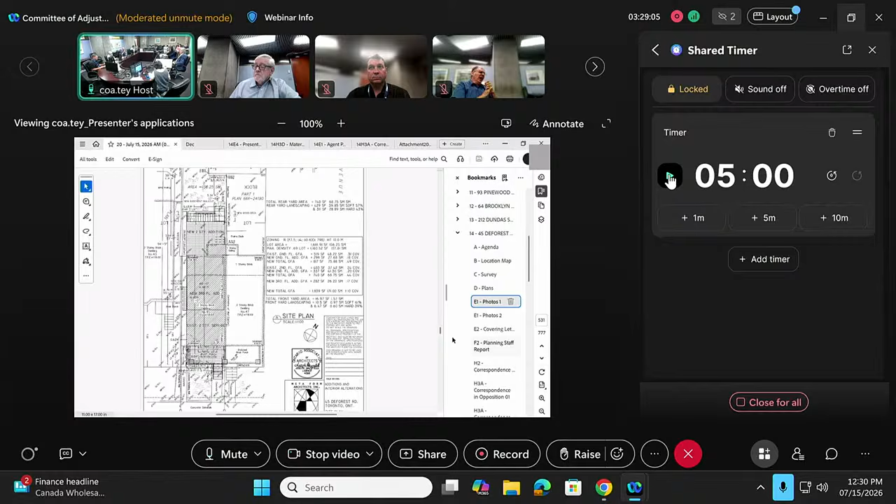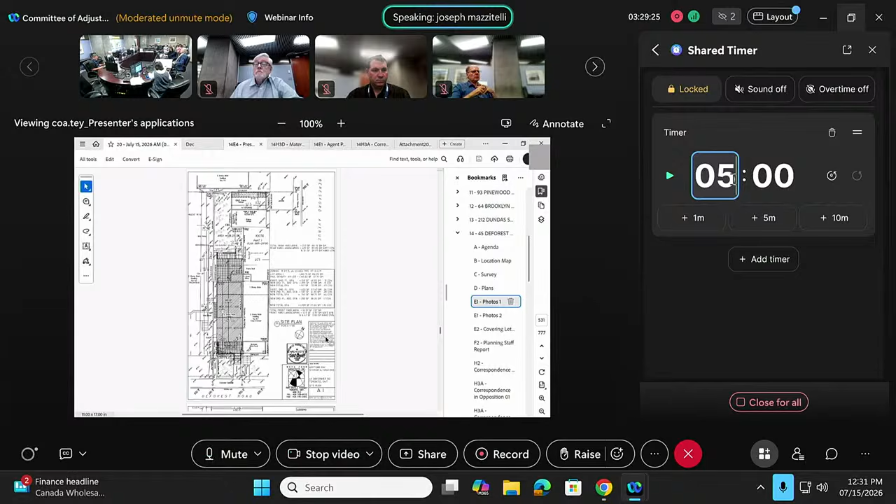Yes, thank you. So to continue, there's a semi with a third floor addition at 18 Ardoc, which is 3 blocks north of our location. I also gave other examples of houses with third floor additions. We are a semi-detached dwelling, and we have the same abilities for additions as a detached house would have. Because it's semi-detached, we should not be penalized in terms of what's allowed.

The zoning review identified the variances, and in a semi-detached condition, you're permitted to build on your side of the lot line at the rear, and also to keep in line with the rear addition of the existing rear wall. We're actually going to be further away by removing that variance. Once again, there are 3-story examples of houses across the street, and examples immediately of filled-in porches. We only have 1 variance.

Obviously, the basement apartment is to be rented, not for the use of the family. When I commented that the house is for the family, I meant that the owners will be the users. Once again, in my opinion, this is probably one of the smallest variances I've ever seen at the Committee of Adjustment, and we hope that you support this and approve it. Thank you.

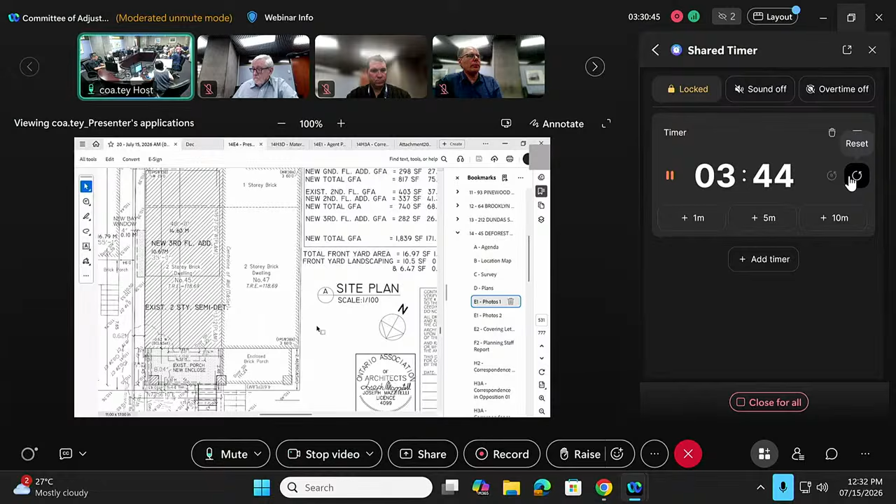Okay, thank you. Any question - yeah, we do have some questions here. Okay, just wait. Quick question: the basement's going to be accessed from the rear walkout. How are people going to be walking along the side of the house to get to that?

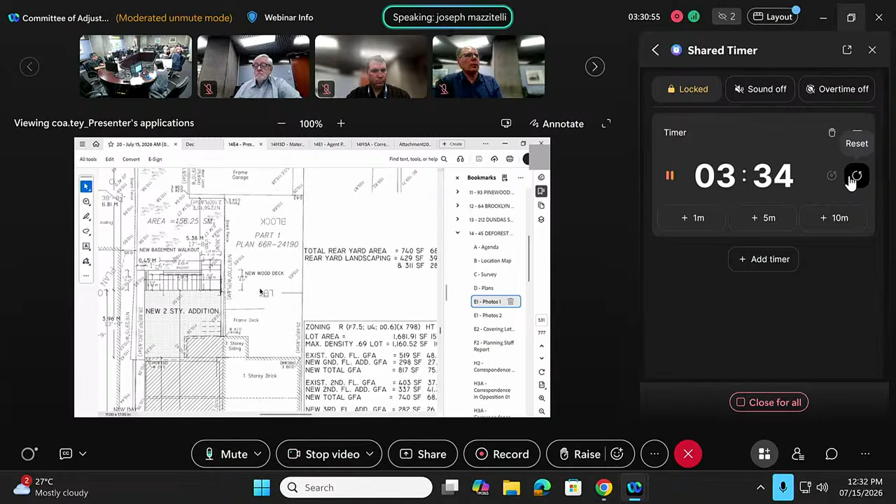No, I've shown an access through the garage for that. Okay, so the access will be through the garage. Okay, thanks. And the second house on the corner.

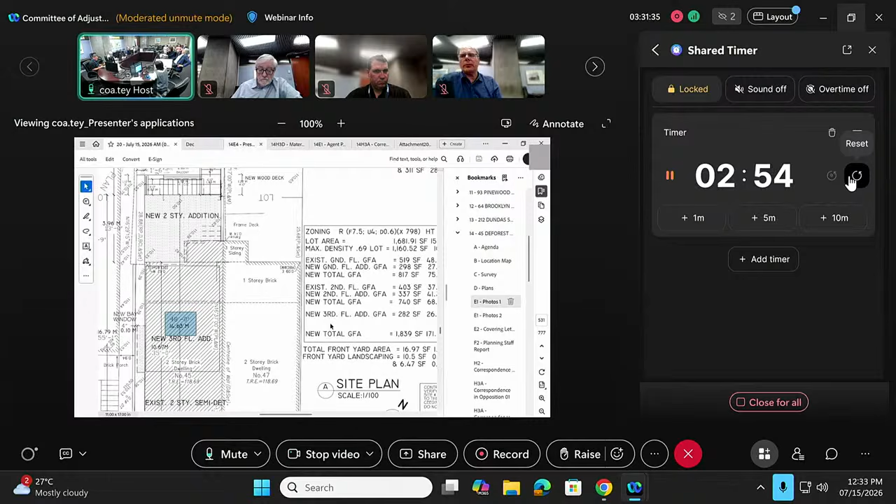I know this isn't a variance, but the overall length of the building, even with the addition, is going to be less than 17 meters still - is that correct? It is, like 14 meters something, it's 14.63, which is allowed, and our rear yard distance is also maintained. So again, those are not variances. Even with the front porch and the rear addition, it's going to be less than 17 meters. Yeah, it's within the zoning. Okay, thank you.

And also, the question has been raised about the purpose clause for this application, which covers the variances - do we need to make any revisions, or are you building all of those? Or do we not - you will only modify this so that you meet all the setbacks and all, right? It's the bay window - the bay window can be removed, I think, right? So do we have to remove the bay window from the purpose clause? Is that correct? Can you address that, please?

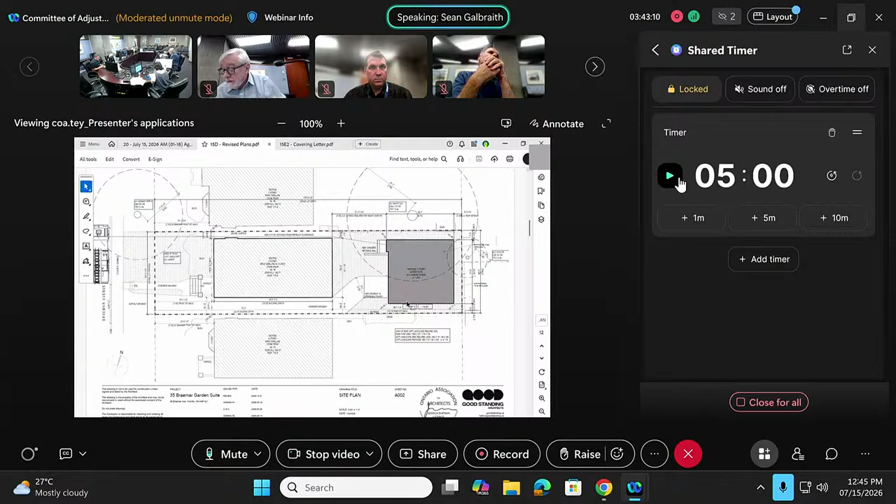Okay, so can we do like a one-car garage, and the door will not extend further than the paved area? With a single car garage door, yeah. Is that okay? Yeah, that's something to that effect, yeah. Great, thanks. I mean, we do have to be careful saying it would not extend wider than the pavement, because garage doors are slightly wider than the pavement usually, so I don't want it to be caught up on a technicality when they go for building permits if it's like an inch wider, you know what I mean?

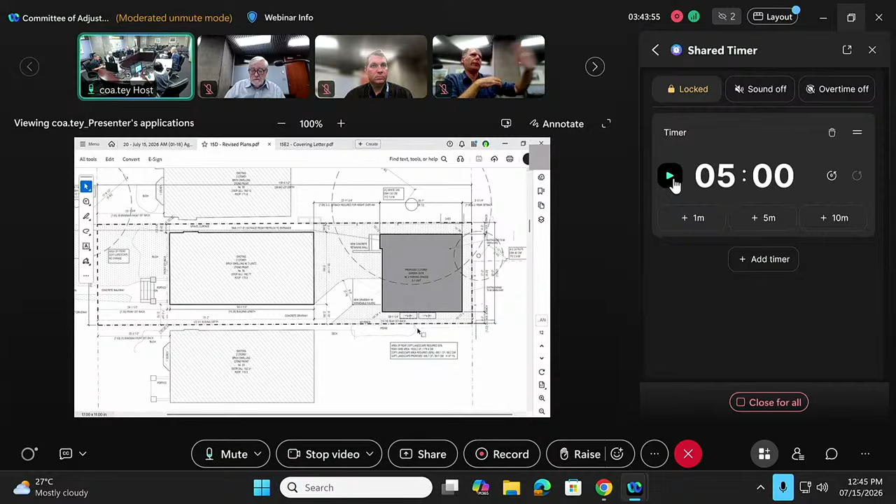Yeah, that would be correct. I would agree with that. Thank you for arranging that, appreciate that. No problem. That makes sense. Appreciate the time.

Are we clear with the revision? I'm happy to move a motion, unless there are any other concerns. I'll move a motion to approve the variances with forestry condition number 2, and with a condition as revised, that it be a single parking spot with a single parking garage door, and the application revised to indicate a single parking spot. Gary, second. All in favor with the condition amended. It's approved unanimously, thank you.

So we'll go to item 16, which is 117 Peter Street. This is to alter the development standard under the site-specific zoning bylaw for an existing mixed-use building by enclosing the north side outdoor patio for the eating establishment, like a restaurant. We've received the survey, site plan, floor plan, elevations, photographs, decisions affecting the property, and also an authorized letter from the commercial tenant, an authorized letter from the condominium corporation, email correspondence from the agent, and the site-specific zoning bylaw. We also received heritage communication.

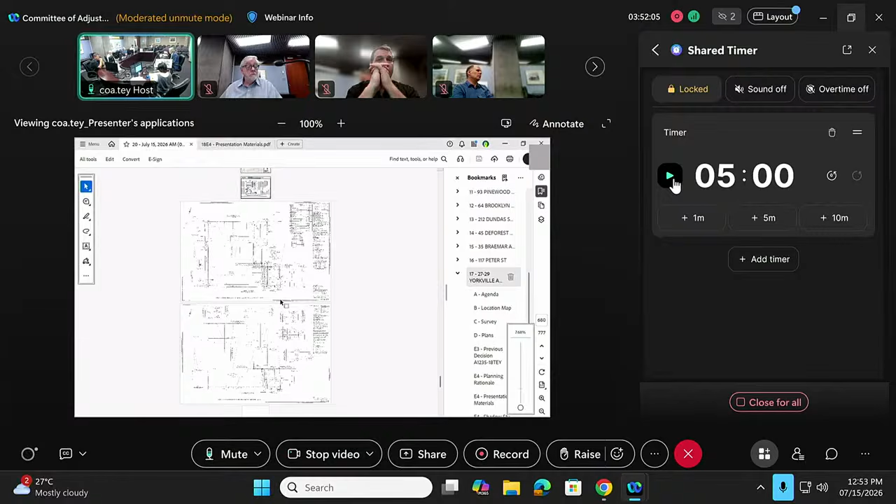I'll put forward a motion right away. I think this is quite simple and straightforward. I don't see any conditions. It's a removal of 5 parking spots and some adjustment to the height. So yes, I'll put that motion forward.

Yes, I'll second, with the statement that car washes are a good thing. Happy to help create one.

Okay, so with no conditions, all approved. All in favor, unanimously. Thank you, so approved. Thank you for coming.

I think the last item on the morning agenda is number 18, 49 Derwyn Road. This is to alter the existing one-story detached dwelling by constructing a complete second-story addition and a front porch, a covered porch with stairs, and a rear first floor deck with stairs, and also to construct a one-story auxiliary building, which is going to be a one-car garage in the rear yard.

The existing garage will be demolished. We have received a survey, site plan, floor plan and elevations, a revised site plan, a red line public notice, 8 photographs, a cover letter, and presentation material from the agent. We have also received a comment from Urban Forestry, and we are ready for the agent.